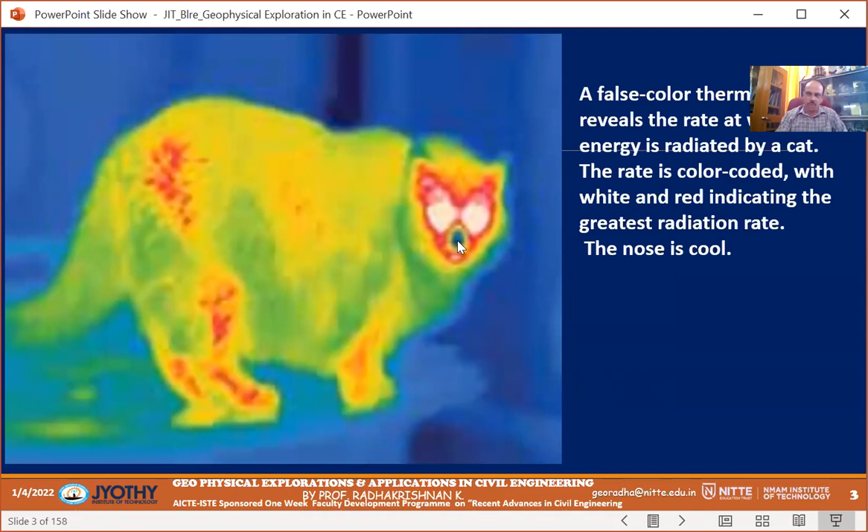I just want to impress upon you that there are so many physics principles, in the electromagnetic wave system, there are so many wave ranges which we have not used, or have not found specific sensors for utilizing. So we have a lot of physical abnormalities around us, with physics principles related to whether it's gravity, magnetic, electric, electromagnetic, or resonance. There are so many such factors.

So the question is whether these physics principles can be utilized for civil engineering problems. There is a lot of scope here. So far, what we have found out and utilized for civil engineering or geophysics is very, very less. So there is a lot of scope, that's what I just want to impress upon you. But we have not utilized it because many times we are not aware of these things.

So why geophysical diagnosis or geodiagnosis? Usually when we start with foundation problems, geotechnics is the main issue, because it's not a regional understanding—in geotechnics, it's a local understanding at the particular place. A sample will be collected, either an in-situ test will be conducted, or we'll take a sample and analyze it in the lab. But it only gives you that particular result, because each site is unique and varies from place to place.

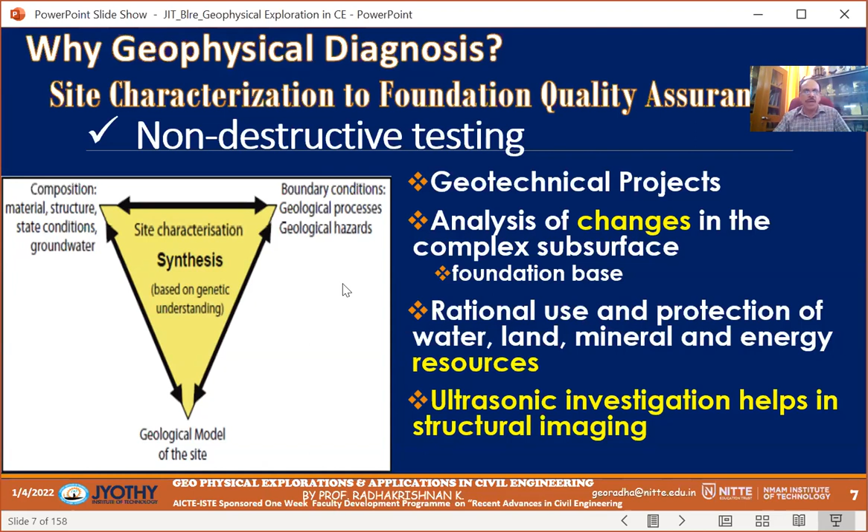These are the methods which we can adopt for investing money, because in most cases civil engineering projects will not have much money for this foundation work, and you have to drill here and there, and you will not get a better idea of it. So what is the need of the hour? A blend of the best.

So starting from the foundations to erecting the structures, as I told, it's applicable, whether it's concrete or foundations or anything. Virtually every structure is supported by soil or rock. Whether it's a tunnel, a dam or reservoir, a multi-story building, let it be anything, it's either resting on soil or on rock. So we should understand that.

And the current and future geocharacterization: seismic, ground penetrometer testing, seismograph, resistivity meter, dilatometer. There are so many such methods, and statistical analysis and numerical methods we are adopting with computerization.

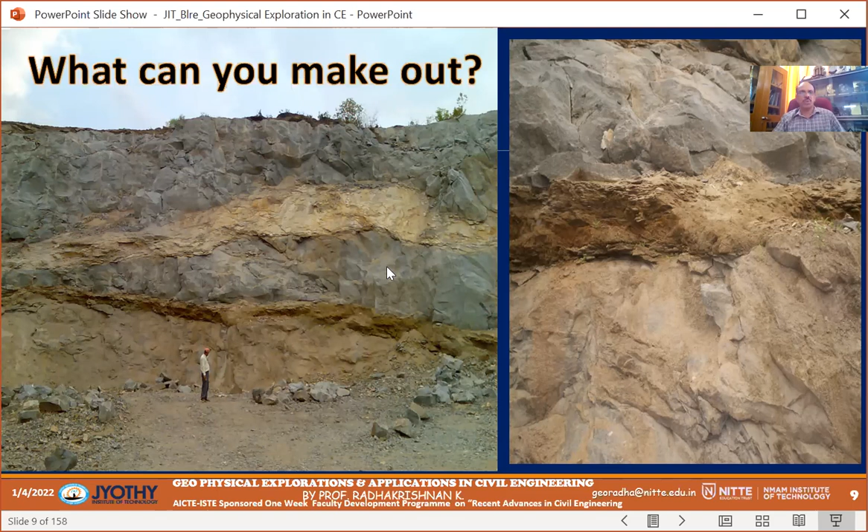So is the bedrock deep or shallow? Who will answer this? A geophysical method will tell you. Is the bedrock highly weathered or competent rock? Again, geophysical studies, a resistivity survey or ground penetrating radar studies, will tell you. Whether it is soft or dense, a magnetic survey may tell you that.

Where are the fine-grained and coarse-grained sediments for the coarse or fine aggregates you want to use? It can be told by geophysical surveys. Where are the best places to drill or excavate and sample the ground? Because again, that's a problem. In a wide area, how many sampling locations should there be? Where should you put the borehole so that you get the exact lithology which represents the entire area?

I'll show you one or two like this in my slides also. So cost-effective geophysical surveys are the best answer for all these questions which you are going to pose before starting any work. Typical parameters of interest to designers and engineers are usually the thickness and extent of layers. How much is the thickness of this particular layer? And the physical properties, the bearing properties, shear strength, all these things we test, bring it to the lab and test.

Okay, so recently we are getting some samples from Karwar offshore. They are going to have some constructions, and they brought the soil as well as the rock samples here for testing. So if you can conduct geophysical surveys and get an idea at what depth the foundation is, it will be highly helpful before doing all these things, because it will supplement them, because whatever is there below, it is only an interpretation, unless you directly see it and collect it. That's why there is no substitute for direct sampling of the ground.

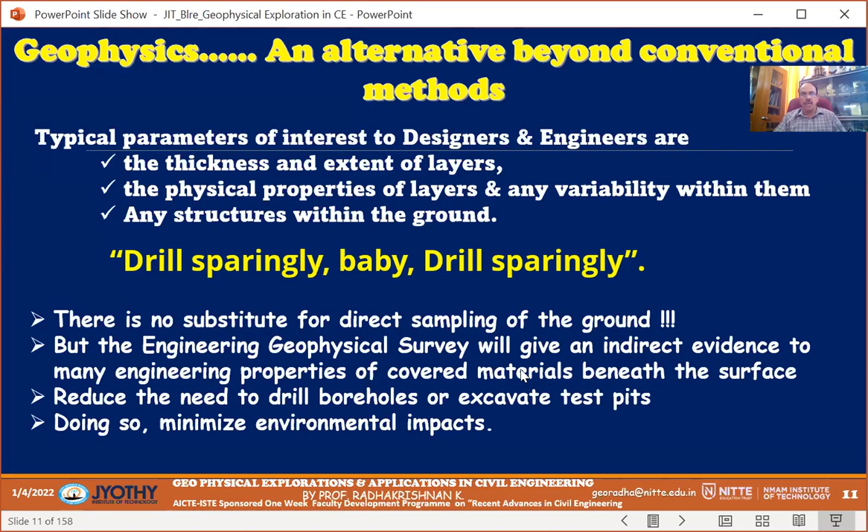All this is possible thanks to advanced geophysical studies, and you can even find out where there is groundwater, in which area it is. What will be the resistance of this area? Whether you can put an earthing for a thermal power plant, power stations, or railway lines, etc. We can think of where it can be a shallow area and put this.

So each site is unique, and site investigation and assessment is very important in the preliminary stage, as you know very well. Foundations, materials of construction, earth resistivity, groundwater, soil thickness, weak zones in tunneling, fault zones in reservoir sites, weakness in road laying, underground pipelines and cables. Often no record is preserved, so immediately after road construction they will cut, break and put a pipeline, and that will be damaged. So underground pipelines and cables, weakness and fissures in concrete roads, all these things can be identified.

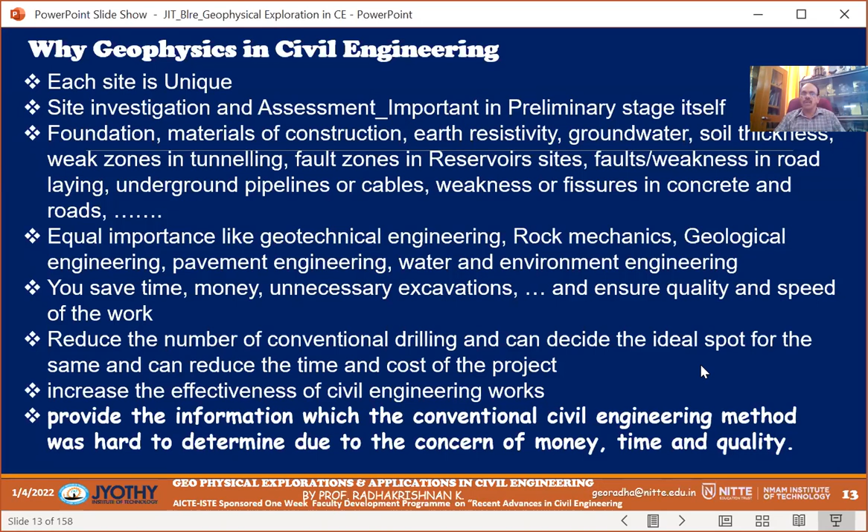Now, as I told you, I can list many things, starting from foundation designs, mapping overburden and soil thickness, volumetric calculation of fill or construction fill, how much has to be filled up, characterizing the geology beneath waterways so that we can optimize pipeline crossings, potentially hazardous abandoned mine workings, how much volume, in which direction the leachate will flow, surveys for construction aggregate mapping, seismic hazard evaluations, dam and levee assessment, permafrost mapping, and locating buried utilities. Many times these utilities are buried and there is no record available. With geophysical instruments, especially GPR, which is easy to use, just drag it along the ground and you get a 2D or 3D picture below, and you can understand what the buried utilities are.

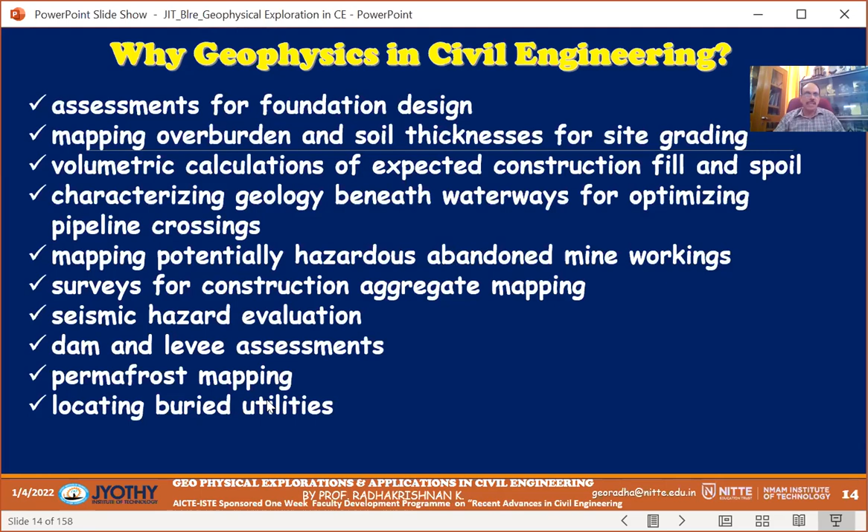So it is less expensive, less invasive, less time consuming, and provides large scale characterizations of the physical properties, that also in undisturbed conditions. You can see many of the times when we collect the samples in geotechnical applications, it is in disturbed conditions. The sample will be collected and it will be brought to the lab.

Locate and explore the characteristics such as depth, thickness, extension, resistivity of minerals, rocks, water, soil, subsurface layers, all these things. Then locating underground cavities, backfilled mine shafts and dissolution features. Then determine the stiffness properties of the ground, because sometimes the resistance will vary depending upon the stiffness of the materials.

Then an integrated approach with the conventional methods will enhance the project. So, as I told you, the potential of geophysics in engineering is yet to be realized, and the application of these techniques is still to be fully utilized. So now let us look at the different geophysical methods. This was a brief introduction about why geophysics and what it is, and what these geophysical methods are.

So we can broadly classify them into two categories: surface methods and subsurface methods. In surface methods, mainly whatever method we can conduct on the surface, not going down inside the earth or soil. So gravitational method: a sensitive gravimeter you can use, and Bouguer anomalies we can detect, because from place to place there is a variation in the gravitational pull depending upon the density of the material. When water is there, it is less dense material, or hollow things, less dense materials, can be identified easily for the foundation as well as groundwater exploration, etc.

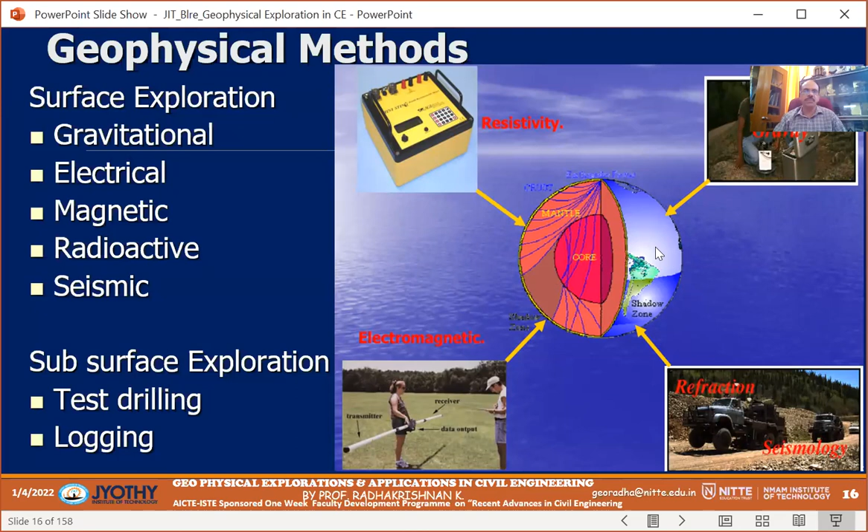So basically, physical properties such as density, magnetic susceptibility, elasticity, electrical conductivity, radioactivity, etc., are made use of in geophysical methods. So it is a wedlock between physics and geology for geological problems, using simple physics principles. One is, as I told you, gravity. It varies from place to place depending upon the density of the materials, and it can be utilized for porous materials or water, which have less density. So Bouguer anomalies are detected. Sensitive gravimeters are used for this.

Then another one is the magnetic method. As I told you, it's an indirect method. A dike or fracture zones can be identified because a dike will have a lot of magnetic particles, and there is a sudden variation in the value. There are two instruments: fluxgate magnetometer and proton precession magnetometer. I have used the proton precession magnetometer. It is a very simple, handheld, portable instrument. Then seismic methods, seismic reflection and seismic refraction, we'll discuss. And electrical methods, we'll discuss in detail.

SP methods: as you know, below the ground surface there is always a movement of ions, or movement of electrons happening because of the movement of the ions.

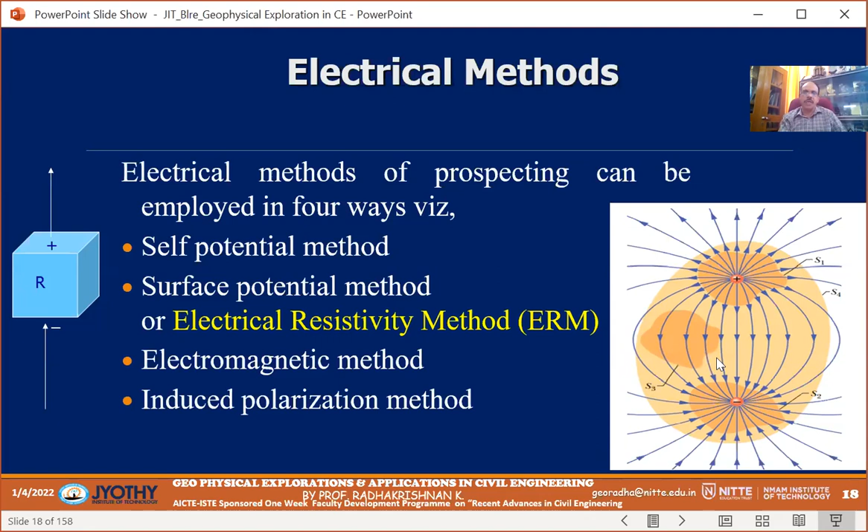So electrical resistivity method has so many applications. As I told you, we are not much utilizing it for road laying, for subways and the thickness, whether there is any fault; even GPR can be used for this. So these tomographic things we can produce, two-dimensional sections can be produced along the cross section wherever we want, so that it is better. So it is shown that the geophysical electrical resistivity method and the dynamic cone method show very negligible difference, almost similar values.

A similar calculation I have made for the SPT, standard penetration test, and the resistivity surveys. So these methods will give the thickness of the surface course, base course, sub-base course, and subgrade, etc. We can do a survey and find out how much they are, whether the concrete or the materials they used are in proper thickness. Because once it is covered, you will not understand, but we can do it. In most cases they put a hole and take the samples, but non-destructively we can do this test without disturbing it. That's what I do.

And this is used in many places. In Bokaro Steel Plant, they used it to delineate bedrock configurations, and in Andhra Pradesh, in the atomic power plant, they used it for the nature and position of the quartzite and to find out the thickness of the quartzite. And in some places, it almost matches the accuracy of borehole drilling tests. And I will tell you an example here; I'll show you later. ERM has been extensively used in a project in Madhya Pradesh to find out the thickness of overlying alluvial deposits. Then it has been used in hydro projects to detect faults, clay beds, caverns, limestone, etc.

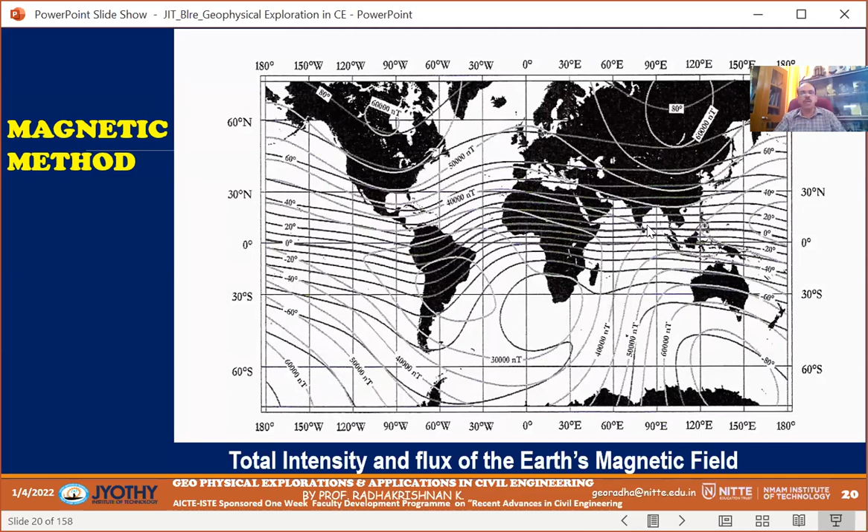This is a magnetometer, and there's a liquid in the coil, and it should be arranged in the north-south direction. There should not be any metallic parts over here. We have conducted it in our ground itself. This instrument will show you the different readings. So along these directions, suppose you want to take a profile. You are suspecting there is a dolerite dike.

In order to find a dolerite dike, we can see that there is a sudden change in the magnetic flux here, and it goes up, and again there is a sudden change where it ends, so we can mark it. If you make one or two stretches, even the direction of the alignment of the dolerite dike can be found, or an intrusive body or a boundary of a particular rock type. So this is the setup for that.

As I told you, there is a magnetic coil here and a liquid inside, and this is the instrument setup. You can interpret like this also: when you get a curve, you can plot it on a centimeter graph sheet, and you can see the depth also varies. See the widening of these bell-shaped curves; according to depth, it's also widening, right? Similarly, you can interpret a dipping dike, a shallow wide dike, and fault zones. Sudden abrupt terminations or changes in values can be noticed and interpreted. But it needs a little bit of technique.

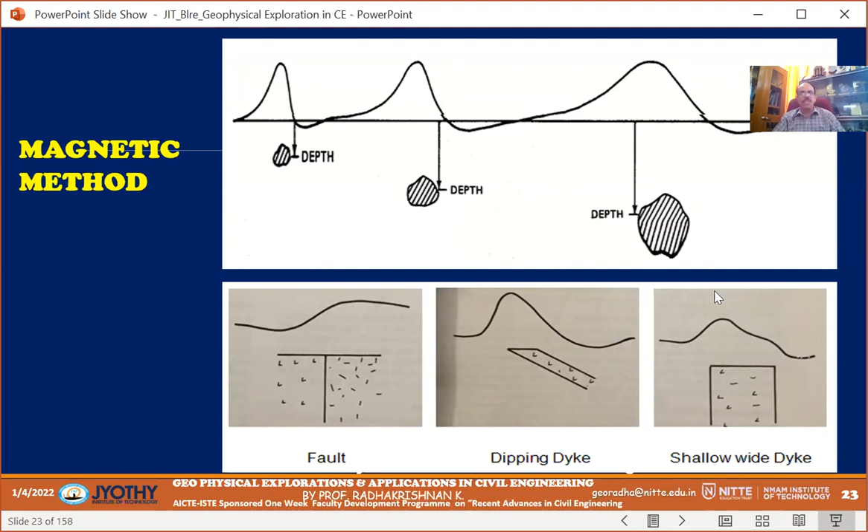This is one survey we conducted in Parapady, where we drilled a borehole and the yield was very high. In the initial survey, I rejected that site. It was one of my friends' sites, and I rejected it for further drilling. But later we conducted a survey and found that there is a fracture.

Two profiles were taken, and I could see here, as I told you, 41,000. Now here it is 35,000, so there's a drastic change in the value here. Whereas in this case, you can see that it is 41,000 to almost 40,200. There's not much variation, but here it is very significant. Then at this place we conducted the vertical electrical sounding survey.

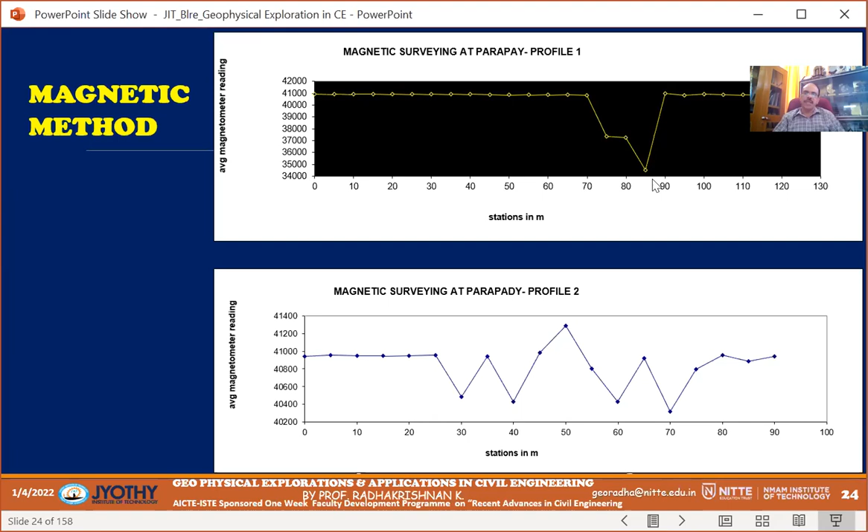Initially it was marked by lineaments from satellite imagery or Google Earth. We marked this, identified the area and conducted the survey here. I found that it is there, and we put a borehole after the vertical electrical sounding was conducted, and we could get the source.

Another one is the electromagnetic method, a sophisticated method where mainly electromagnetic waves are used. In geophysical hydrocarbon exploration, this method has been used widely. This is an airborne electromagnetic survey. The transmitter is located here, and you can see midway a magnetometer and a receiver.

It will be inducing a field, and if a conductor body is there, like water or an ore body, there will be another field, because the electrical and magnetic fields are perpendicular in direction. Automatically another induced field is created, a secondary field, which we can measure, and the variations can be understood.

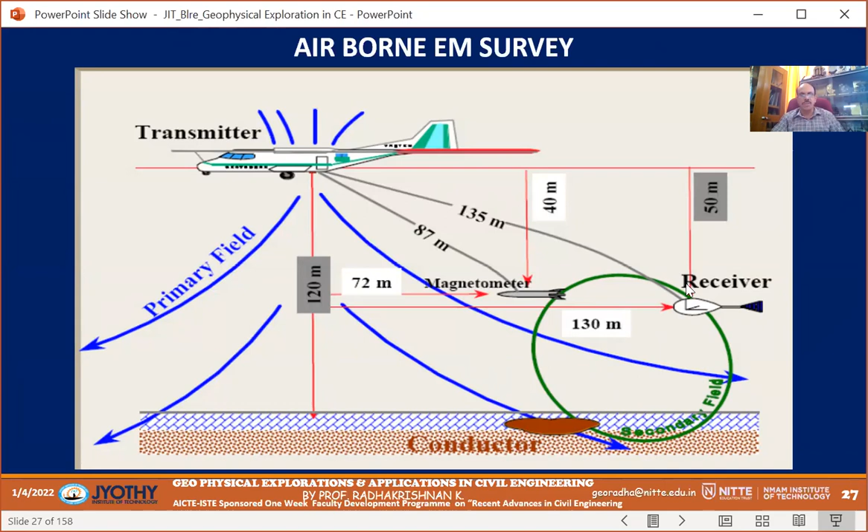These are recent methods which I have seen. Just before Corona started, I thought of training in that, and I went to CGWB in Bangalore. They had purchased one instrument and they were also in the preliminary stage of understanding it. But unluckily, due to Corona, I couldn't continue that.

So this magnetic resonance method they used is a direct method for detecting groundwater, and there's not much time involved in this.

What happens in this case is water will be in natural equilibrium, water molecules towards the magnetic north. When the current is sent, they will be polarized. So you transmit a specific frequency to excite the water.

They will be excited and will be shifting the polarization. For these polarizations to return back, it will take time. So when you send a current and stop it, depending upon the depth you want to penetrate, that much time, how many amperes, and how long a duration, you can decide, and based upon that it will turn back.

So the signal will automatically reverse back after some time. We have to take the time the water stands with the magnetic signal recorded on the surface, during its return to equilibrium. These properties can be utilized, and what is used here is a big rectangular or square loop created out of wires.

This loop is put on the ground, and you send the current, and it creates the resonance. As I told you, it will be charged - the protons in the water molecules will be charged.

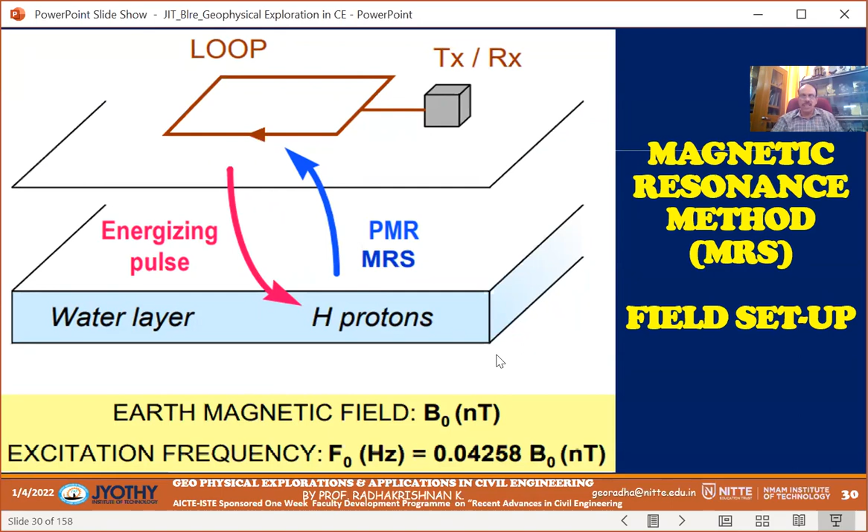Suppose this is the water layer - the energizing pulse goes out and the resonance comes back and is recorded by the instruments. It's quite interesting, and this time will decide the result.

Depending upon the depth of penetration, you can use something like 1 to 3 kilohertz, or 40 milliseconds time sending the current, and noise can be eliminated.

Now once you stop the current, there's a dead time of about 35 milliseconds, and it starts regaining the molecules back. So a relaxation signal will be coming, and based upon that we can interpret.

So look at this - the pulse moment and the curve we can understand. This shows a very shallow one as it is shown, whereas a deeper one, you can see the pulse moment is gradually taking place and increasing. And here there's a combination of shallow and deeper.

Similarly, there is a medium aquifer - look at the curve. Based upon the curve, the pulse moment and the signal plotted on the x and y axis, we can interpret the thickness of the aquifers.

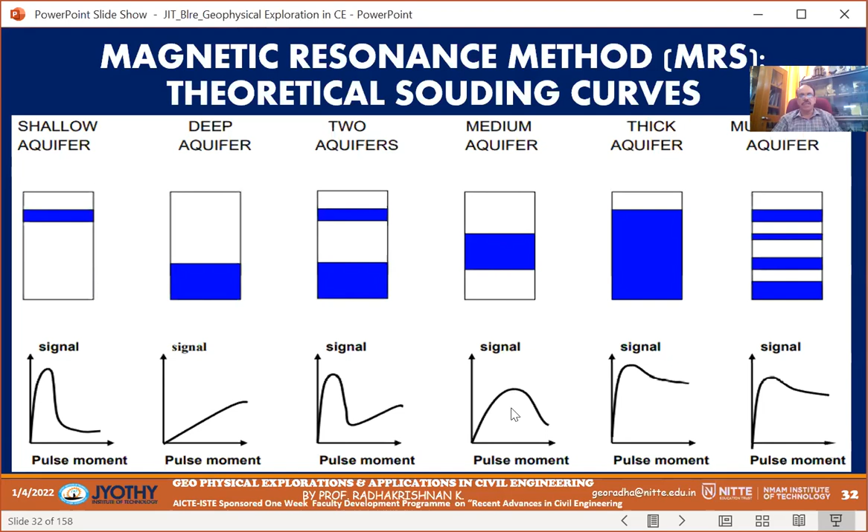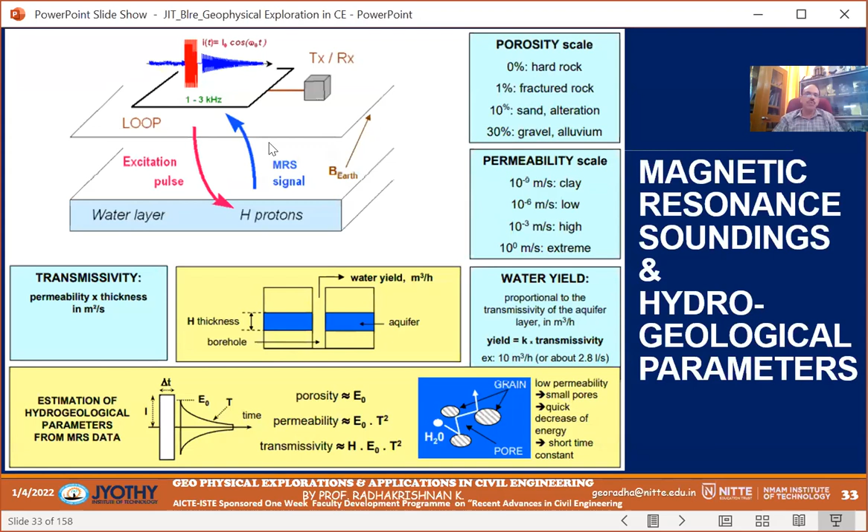So this is how the porosity, permeability, and thickness can be predicted based upon the values we get here. I'm not much familiar with this - I just know it and introduced the instruments, but couldn't do a field survey for that.

But I found this very interesting, and you can see the difference between resistivity and magnetic resonance signals. In magnetic resonance signal loop methods, even dry conditions can be easily found out using the curves - the pulse moment and the signal curve.

When you look at it, the signals will be very low here, whereas here you get very high signals. The pulse also, when the time increases for longer duration, is there, whereas it will be only for shorter durations and low.

But in the resistivity methods, what happens is we can't find out whether a sandstone is wet or dry - it won't make much difference here. But again, it depends upon the interpreter, who if experienced can do it.

So this can be used in another method - here you can see a dry area. In the dry area, the signals at depth - this is a depth factor here - you can see there's not much signal.

But in the wet area, the aquifer area, look at these pulses - they keep increasing. And second, you can see the water content is increasing like this, and permeability also is increasing down.

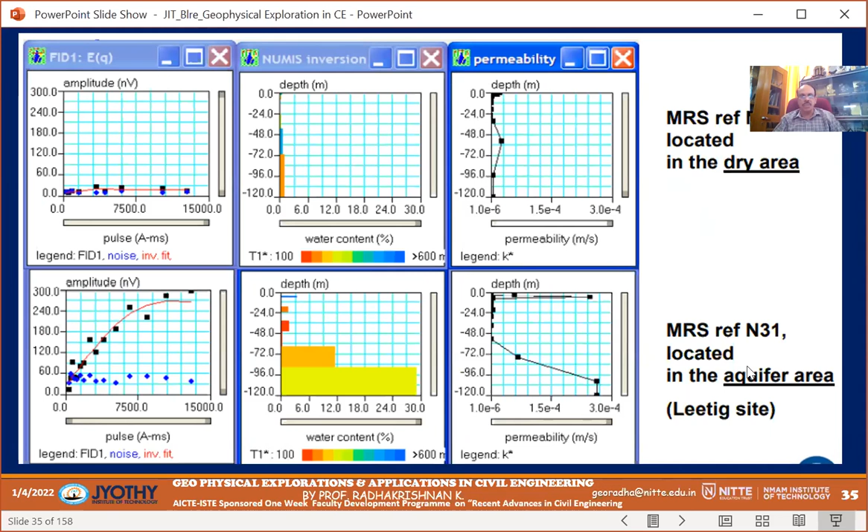So by that way, it can be decided what depth, because high permeability, high aquifer content, or the porosity is there, and transmissivity also, because that depends upon the thickness. So aquifer thickness, yield can be predicted easily from these methods.

Then another one is the ground penetrating radar, the GPR exploration technique that uses a simple instrument which you can drag along the ground, either a belt or a handle. A cable line or a fault or anything can be easily seen, just like a scanning image of what is down below. It's mainly used as an electromagnetic reflection technique, and the depth of penetration varies depending upon the antenna length, and the strength of the antenna.

I found that this can't be utilized for very deep things, but for a road study etc. it is very easy, I feel, because it's shallow depth. For some foundations etc., this is enough, more than enough. We can use it for archaeological studies, forensic science, pipelines or buried objects, geology and hydrology, engineering construction foundations, highway road surface analysis.

So the image is like this. You can see that very easily you can handle it. Only thing is some surface corrections you have to do. There are softwares available for that, so some undulations you have to flatten.

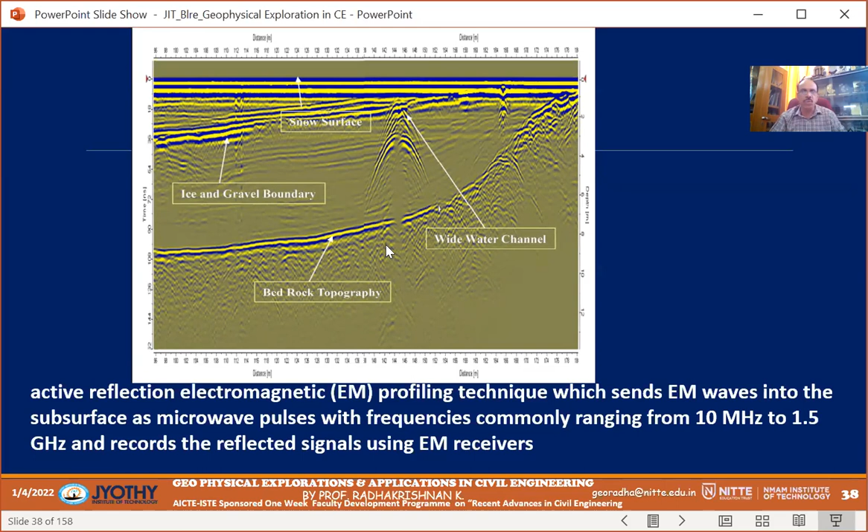But once you do that, you can see the bedrock topography, how a dumped material looks, and a water channel if it is there. All these things, or a buried material, you can identify using this reflection electromagnetic profiling technique. It uses 10 megahertz to 1.5 gigahertz frequencies mainly, and it varies, as I told you, with the antenna.

So quality assurance in foundation engineering can be given by this method, checking foundation elements, because it's not accessible for visual inspection, but this it can be done. There are small changes in construction material, concrete mixture, whether it's proper, you can understand.

Passive seismic interferometric techniques are used for ultrasonic transmissions and tomographic studies. We can do it and understand whether the masonry constructions or the concrete constructions are proper, or any mistake is there. Then moisture and corrosion detection is also possible using these techniques.

Structural investigations allow the detection of rebar and other elements at depths greater than those accessible by conventional eddy current methods. So instead of eddy current instruments, you can carry this. It checks foundation elements, geometry, integrity, and durability, and gives a better detection rate for metallic objects than ultrasonic methods, because this will not have any problem with metallic objects.

Then spectral analysis surface waves, and multi-station analysis of surface waves can be utilized. This allows effective pseudo 2D imaging of the shear wave velocity. Then quality assurance in foundation engineering, and passive seismic interferometric techniques for tomography, etc.

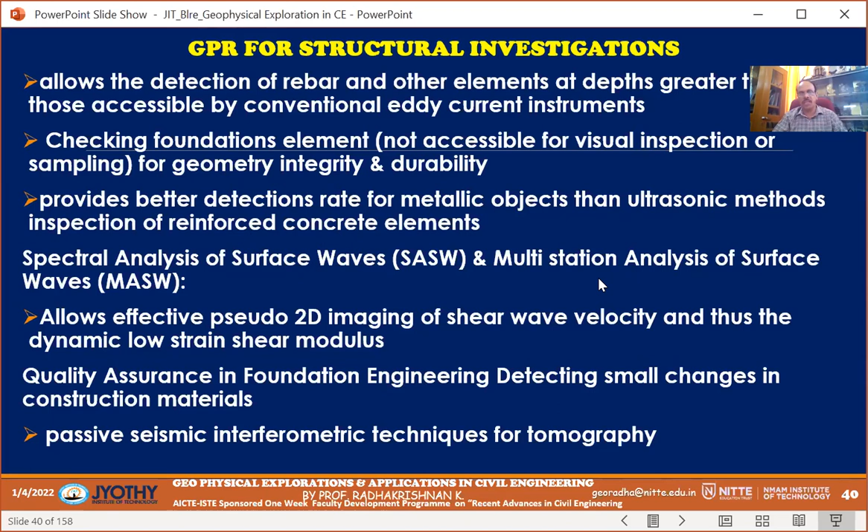Now another one is seismic methods, widely used for oil exploration etc. I'll just run through it because the main topic is still remaining. So seismic reflection method and seismic groundwater exploration, mainly seismic refraction method is utilized, and whenever the wavefront hits a water body or a boundary, it will be reflected as well as refracted depending upon the elastic medium. So that can be utilized for this. There are so many advantages for groundwater table, weakness zones, etc. I'm not going into much detail there.

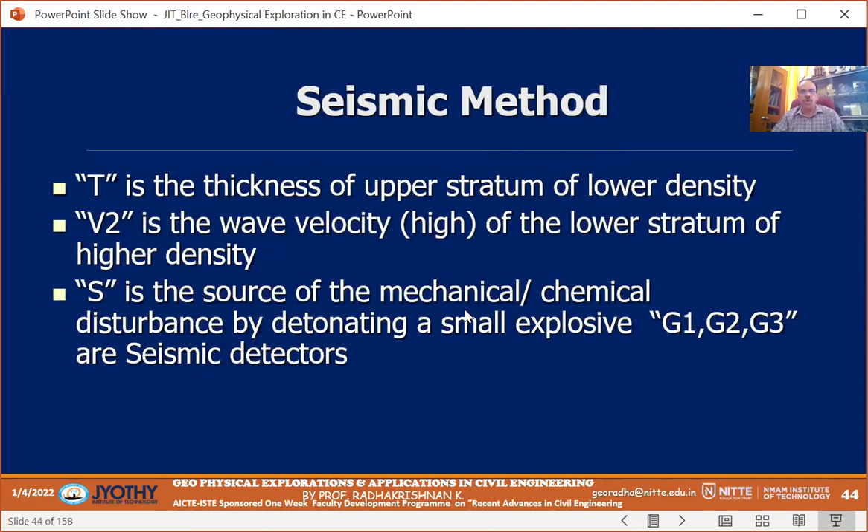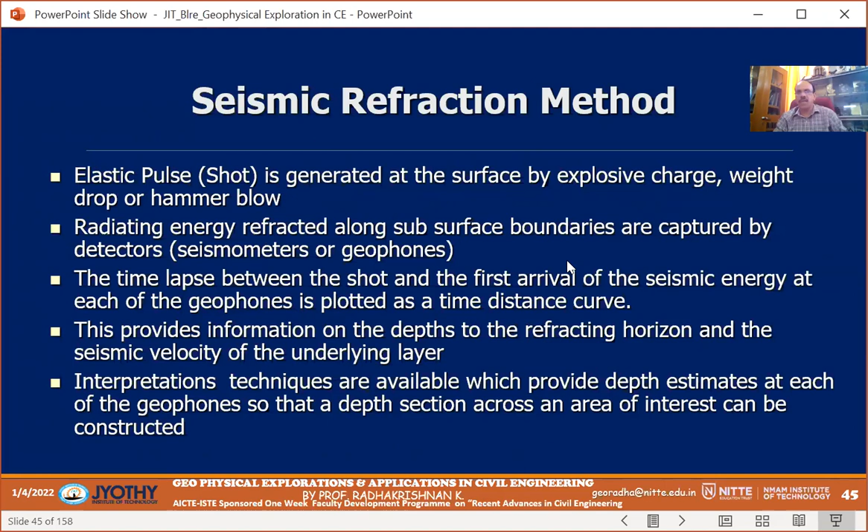So seismic propagation, the types of artificially generated waves in the ground. Then in refraction methods, a charge or a weight or a drop hammer is used, and geophones will be connected at different distances, and the time to reach there is taken into consideration, and we can calculate the depth of the body which is there. So this is the method.

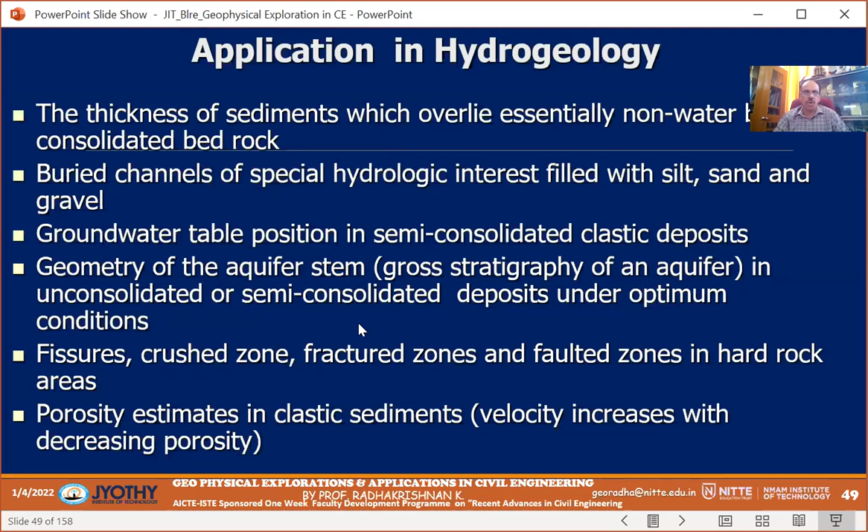So each of these velocity time lags, reaching from primary to secondary waves, that time lag we can plot out, and we can find out the depth of each wave type. Then refraction methods are mainly used in buried channels, groundwater table positions, fissures, crushed zones, porosity estimation, etc. Then we'll come to the main thing, which is the electrical methods.

Usually in electrical methods, one problem is that we need a straight line for laying the wires, because the potential electrodes and current electrode should be laid in a single line. In some places like cities, this will not be possible. So we can put one current electrode at infinity, or use dipole methods or something like that.

There are different configurations, but I will mainly discuss the commonly used configuration here.

So that's the situation regarding electrical methods and resistivity, which is an inherent physical property of substances. Resistance offered and resistivity are different. The resistance offered to the flow of electric current by a unit cube of a substance is called resistivity. There are good conductors like pyrite, chalcopyrite, etc. Many sulfide minerals are good conductors, but the majority of ore minerals are poor conductors.

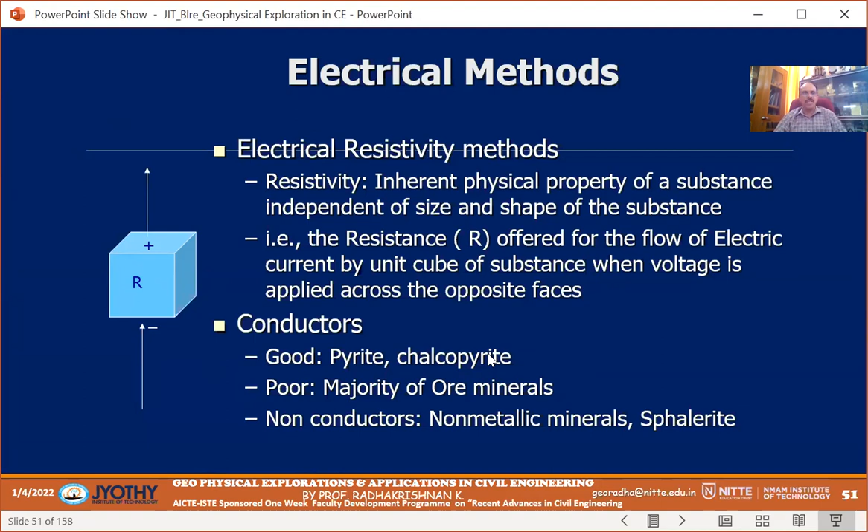Water is a good conductor, so that is one advantage. It all depends upon the mineralogy, porosity, saturation, and quality of the saturating fluid. If it is highly saturated, there is high conductivity, and if it is highly saturated with salt water, conductivity is still higher. I have an experience from a survey conducted at NITK beach.

All 5 instruments we tested failed there because no reading was shown. I thought the instruments had failed, but when I went back to the lab and checked, they were working. The issue was that it couldn't even read the reading, because of the high conductivity there was no resistivity being offered.

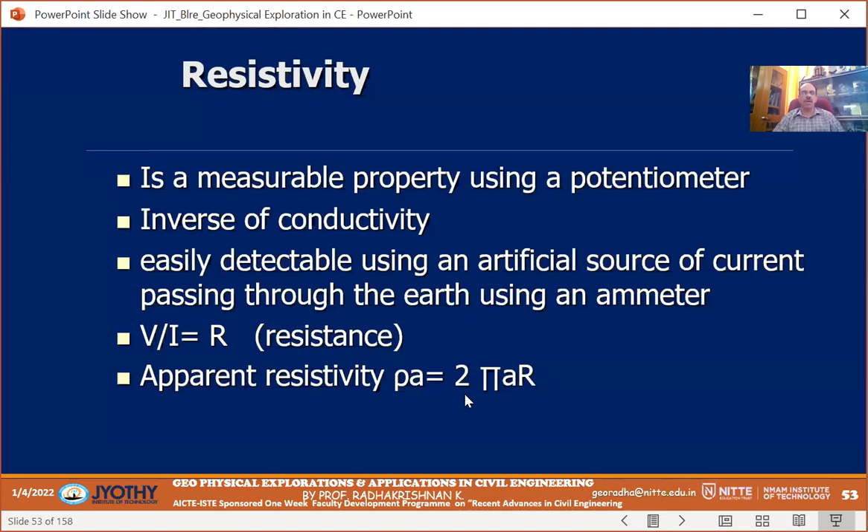So we can find this out using these equations, because there is a difference between resistivity and apparent resistivity. Resistance is what we get directly with the instruments when recording in the field. But apparent resistivity depends upon the material or the geometry of the setup used, so a factor has to be introduced. 2 pi a is the factor introduced, multiplied with the resistance we measured, and this depends upon the geometry of the materials. This is how it is derived.

If you take a wire of a certain length, resistance is directly proportional to length and inversely proportional to the area of cross section. That is why in transmission wires they use twisted wires, because transmission loss can be reduced when the area of cross section is more. It also depends upon the material; the resistance offered by a copper wire and an aluminum wire is different, so resistance offered by different materials varies.

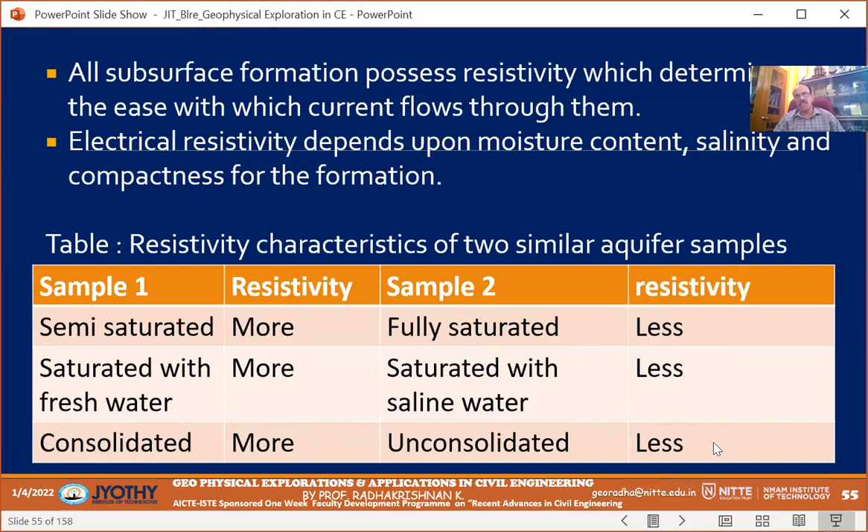This can be calculated and found out using certain methods that we are going to discuss. You can see how it varies: semi-saturated material will have more resistivity, but fully saturated will have less. So saturation is one factor. Saturated with fresh water gives more resistivity, but saline water gives less. If it is consolidated, resistivity is more than if unconsolidated, which gives less resistivity. This gives a clue about what type of material lies below, based on these properties.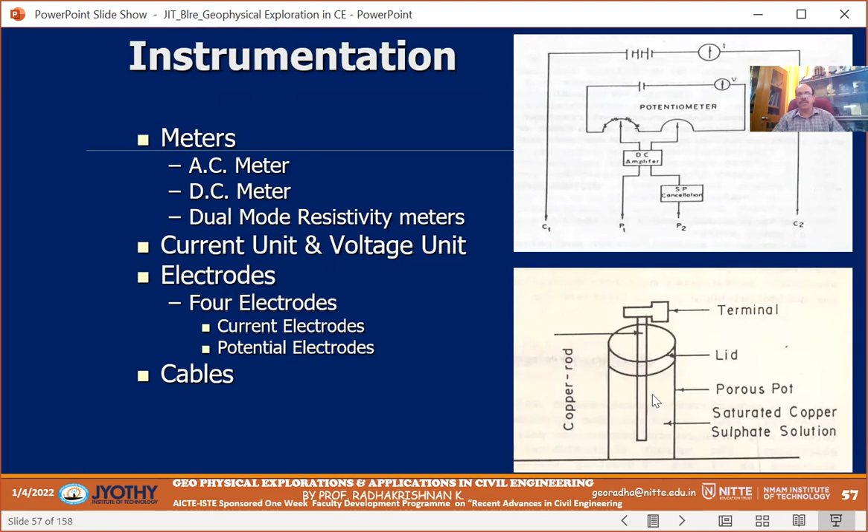There are two types of methods: one is vertical electrical sounding, which we call VES, and the other is profiling or traversing, scanning at a stretch in different places along the line, called profiling or traversing. It goes up to 50-60 meters depth, depending on how far we are placing the current cables. This is the vertical electrical sounding, using the Schlumberger arrangement configuration.

So the potential electrodes will be very close to this instrument, 0.5 meter or 1 meter. That will be varying after some time. But we can say very close, connected to this point where I am surveying, and the current electrodes will be put far away. And gradually the distance of the current electrodes will be increased, while the potential electrodes will be kept constant.

This is one method. And the other one is the Wenner electrical sounding. This is the Schlumberger configuration. In the Wenner configuration, all these distances will be equal. That means the distance between the two potential electrodes will be equal to this distance and this distance. All electrodes, that is a Wenner configuration.

But most of the time we use this method in these areas because it saves time, because all the 4 electrodes have to be changed otherwise in Wenner, whereas here only 2 electrodes have to be changed. So it should be arranged in a straight line. So it will give the promising potential aquifers and saturated zone, and the quality of the water also.

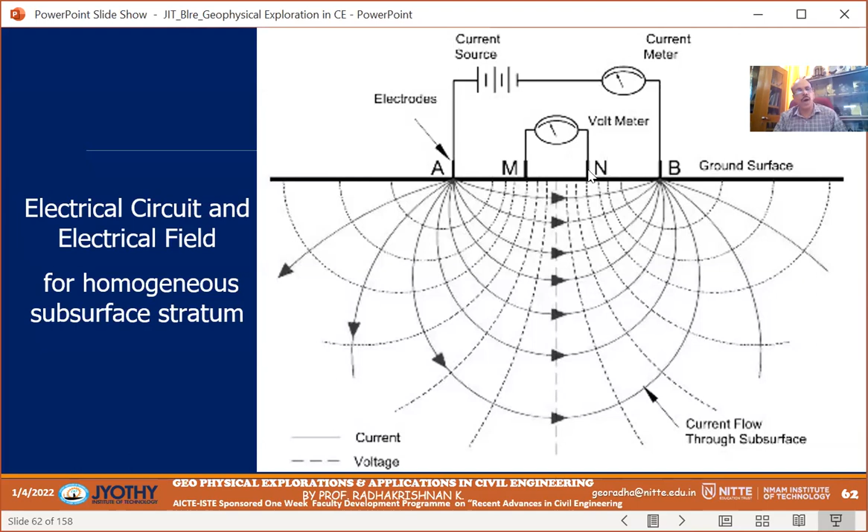So V by I is equal to R, that's Ohm's law. As a result of the current, a potential will be developed in between. So we use a sensitive voltmeter and measure it. I we know and V we know, so we can find V by I equals R multiplied by this factor K, and K is found from 1/AM minus 1/BM minus 1/AN plus 1/BN. That is simple, as you can see here. Yeah.

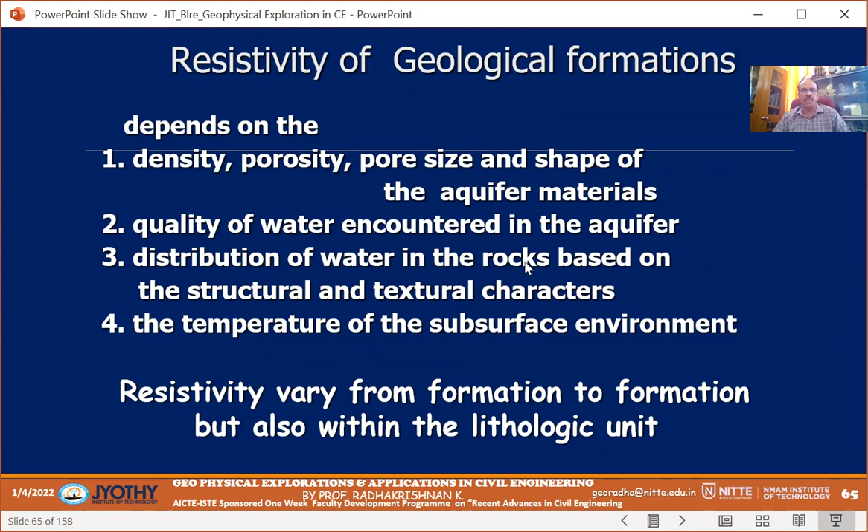We'll come to that. So in water bearing formations, the contrast can be fresh water and so on, weathered, hard rock, etc. And it depends upon the density, porosity, pore size. So by looking at the value and the curve, we can interpret the bottom as well as the formation type. And it varies with the temperature also. Igneous and metamorphic rocks are very high, 10 raised to 2 to 10 raised to 8 ohm meter. I will show you some examples.

Sedimentary and unconsolidated, look at that, the values are very less, because it's a porous environment. So porosity has an impact, and hardness gives high values. Sometimes in laterite terrain, the current will not go at all. So we have to pour some salt water at the current electrodes so that the current will be good. Otherwise, it will not transmit. So such problems also will be there.

So this is the analytical derivation which I was talking about. When a current is sent here, spherical equipotential lines will be created around it like this. It's just like a spherical flow pattern. And this radius has an influence.

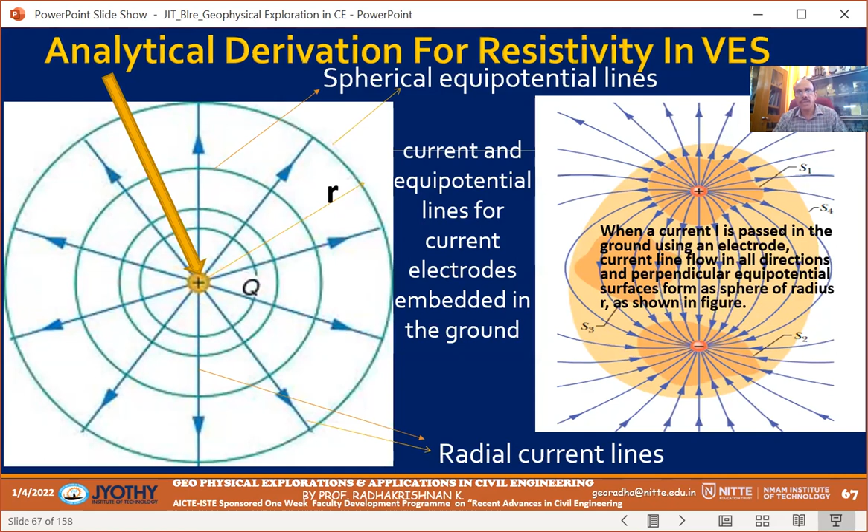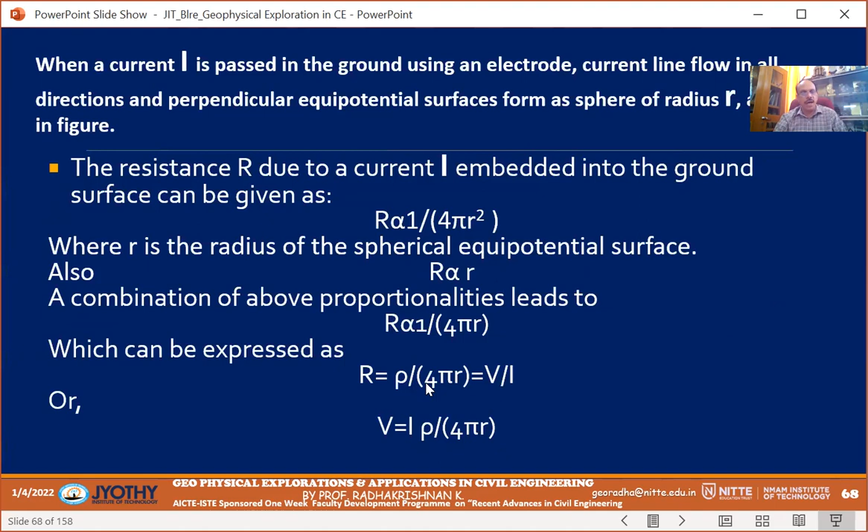And again, I am not going into much of this, but we can understand that V by I is equal to R, and R is nothing but rho by 4 pi R. Since it is a half, because it is not a complete globe, it is going only hemispherical, so we are taking it as 2 pi R. So this is how it is derived, and this is the Schlumberger configuration when you take this R1 and R2. This is what we have done, right?

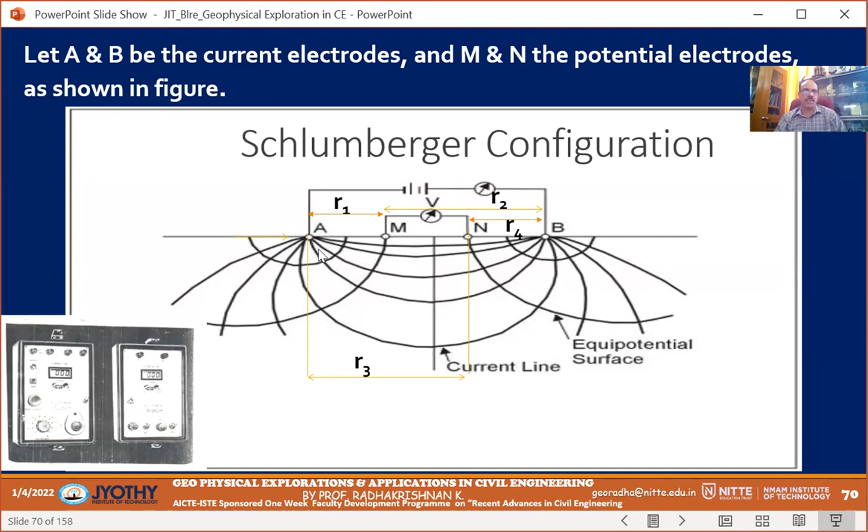Potential due to A, this current, at M, at the point here. What will be the potential created by A at M? What will be the potential created by B at M? And what will be the potential created at N due to A and at N due to B? And this is derived here. Due to A at M, it is I rho divided by 2 pi R1. And in a similar way, due to B at M, it is minus I rho divided by 2 pi R2.

So the net potential is calculated here, right? This minus this. So finally, you will get an equation: Delta V is equal to Vm minus Vn. That is voltage at M minus voltage at N, the potential difference between these potential electrodes, and that is I into rho by 2 pi, into 1 by R1 minus 1 by R2 minus 1 by R3 plus, because minus into minus is plus, 1 by R4. So this is what we have derived from these things.

So finally, rho A is equal to K into delta V by I. This is a constant factor which we derived right now. It depends upon the configuration; this value will be varying. AB by 2 minus MN by 2 the whole square divided by MN for the Schlumberger configuration. It varies for the other one, the Wenner arrangement. So finally we got rho A equal to 2 pi A into V by I, which is R; we derived 2 pi A from that.

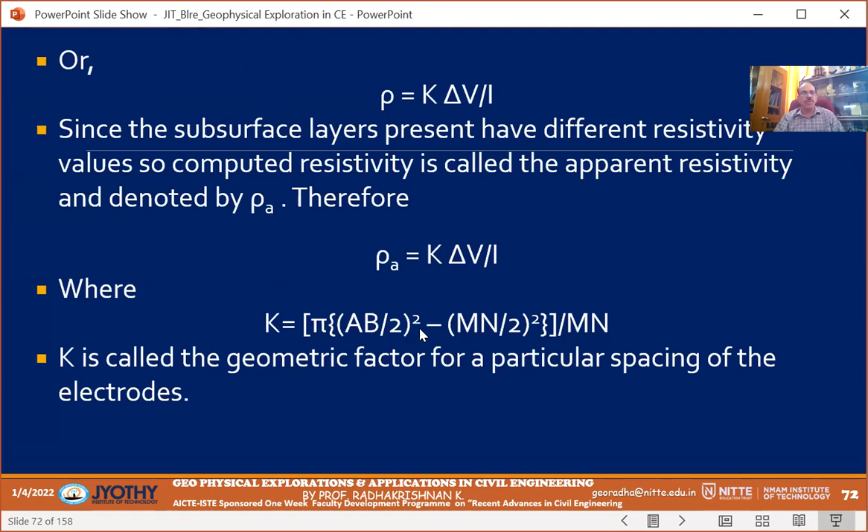Similarly, for the Schlumberger configuration, it is pi into L by 2 the whole square, which we derived right now here. L by 2 the whole square divided by MN, into V by I. This is R. So this reading we are getting in the field, and we have to multiply it by this constant factor. We get the apparent resistivity instead of the true resistivity.

So this will be plotted in different ways. You can use the master curves; Orellana and Mooney is the Bible for that. There are different master curves we have to match. It's a tedious process. Computer modeling is what we use nowadays. Initially we used all these things, but with interactive computer modeling or inversion methods, we can feed the data. A synthetic curve will be produced with the original plotted curve, and you have to match it; the one coming very close will be taken. Then the inverse slope method: this method is very easy, and software is available.

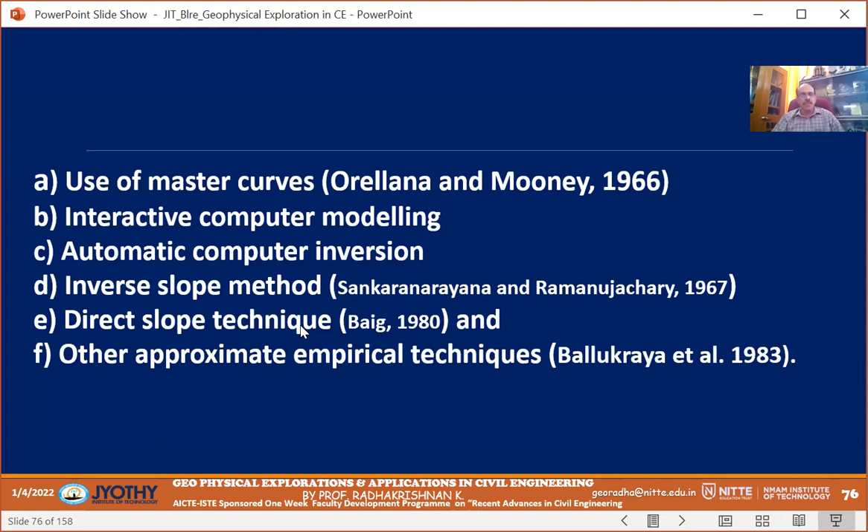It is from Ramanujachary's PhD thesis; he was working earlier as a scientist in the National Geophysical Research Institute in Hyderabad. He trained me very long back, in 1990. So I use this inverse slope method because it is easy. We also use the other methods because software is costly. Direct slope methods and other approximate things can be used. So look, this is the curve we finally get. We are plotting the AB by 2, from the central point to the current electrodes, which is called AB by 2.

And here is the resistivity which you are getting. So say for 10 meter, 1 meter, I am taking 10 meter. I am interested only in an open well, so I will take only up to 20 meter. So this will be plotted in double log sheets. So when I plot this, you can see one curve I plot. The values going on, it's a homogeneous curve here. Values going on decreasing here, and it's increasing.

So if it comes to 45 or more, it shows hard rock. So if you are looking for a foundation, when you conduct a survey, if you are interested in foundations, where the hard rock starts, where I have to put the pile or the foundation, up to this will help you, because where it starts, that will be the point where the hard rock starts. So 45-degree inclinations. So this shows that rho 2, that is the second layer resistivity, is less.

And this one can be for an open well also, because here the values are pulled down. Whereas in this case, it's an A type of curve, very hard rock, going on increasing, no water in this. Whereas here in this case, the Q type of curve, the rho values, apparent resistivity values, going on down, pulling down. That means it will be saline water if it's deeply pulled down. It will be shallow if it is very close, and it depends.

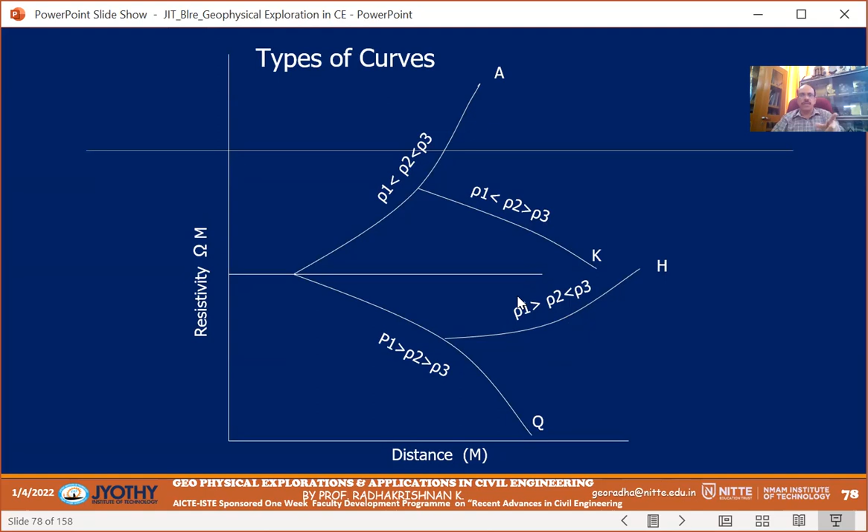Water is dripping, you can find here as it is. Right here also water is dripping. So here it is an open well, an aquifer is there and it's going on. Now if it's more than 45, you'll get foundation rocks. So this way we can interpret. It's 3-layer curves, rho 1, rho 2, rho 3 curves.

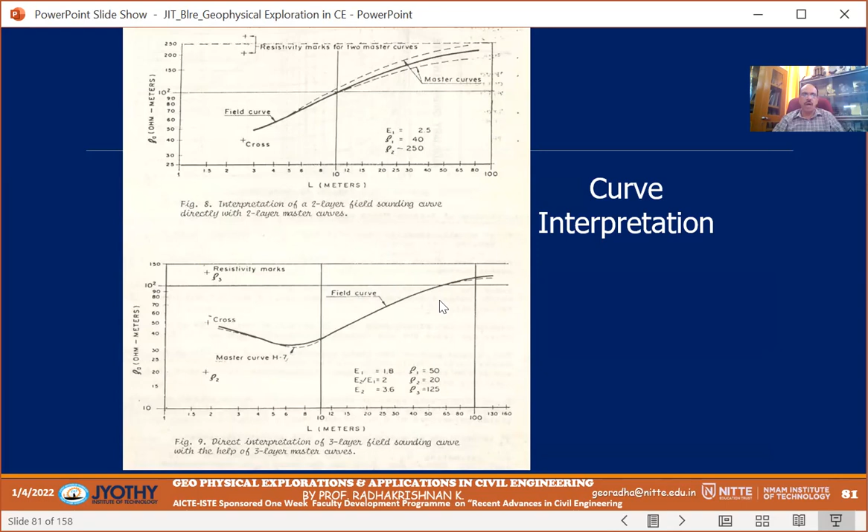So now some typical curves as I described: A type of curve, H type of curve, K, Q type of curve, etc. Now let's look at these typical resistivity curves and how curve matching techniques are used in interpretation. I'm not going much into this. This also I'll skip. So as I told you, 45-degree if the curve comes, though this is not a hard rock. If it's a bedrock non-fractured, or a fractured bedrock, even the shifting in the values can be seen and interpreted.

So with a little bit of expertise, just by plotting the curve you can say where the water is available and what the thickness is, etc. There's no need of interpretation also, but interpretation will give you a much better analysis. So these are the geophysical target zones, fracture zones. Okay, so you can see how the same curve is matched and interpreted.

And as I told you, how will you understand a dike? You can see that there is a sudden increase in the resistivity value, whereas in the fracture zone the value is going on decreasing. So if I am going for groundwater, I will look for this type of curve. Okay, and it is plotted in centimeters. And when it's a dike, on this upstream side of the dike, I will prefer a good borewell here. But here there will be no water.

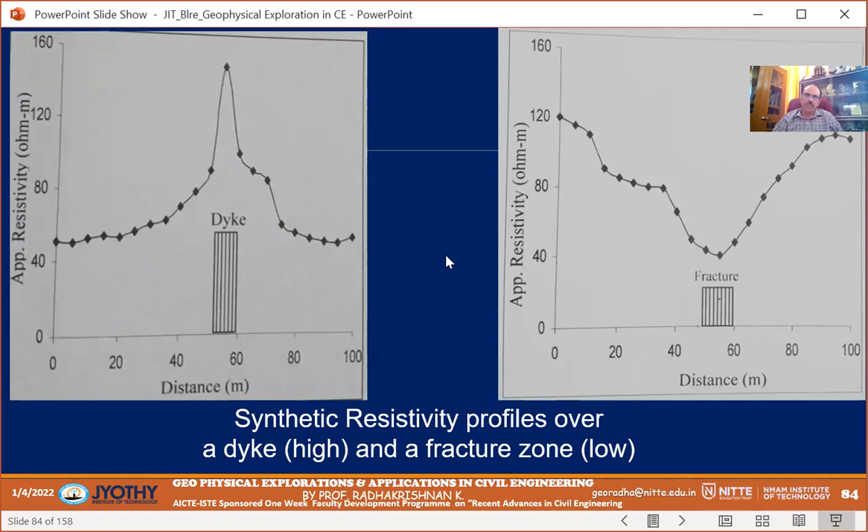So these are the things which you have to interpret based upon the geology of the area also. So this is the profile of a dike, etc. I'm just skipping it. So, strip resistivity curve.

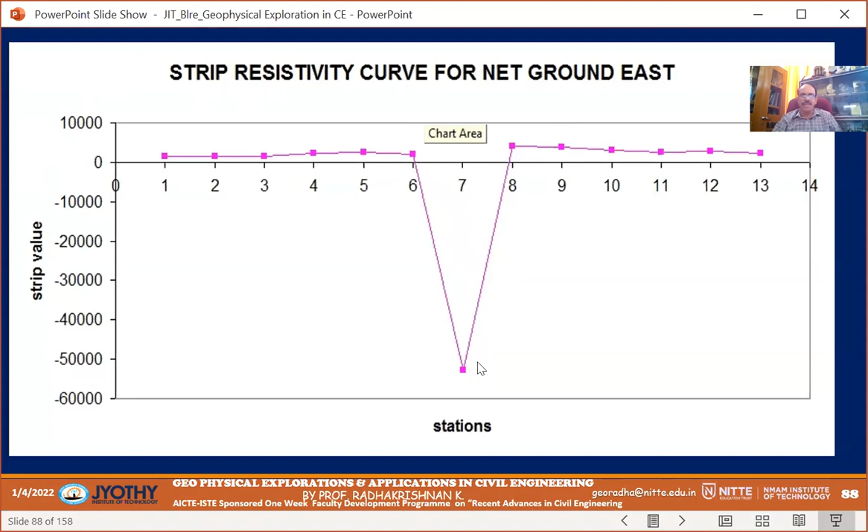Sometimes in an ordinary survey, we will not find a fracture zone, a potential zone, which is very small in thickness, but using the strip resistivity methods, conducting 2-3 layers and subtracting that, we can find out the real lineament or fracture zone, and it will yield you good water. So this is one we have conducted on the ground here and drilled. Here you can see a sudden variation in the value which happens here.

So why geophysical explorations? I told there are so many purposes: earthing surveys, foundation, detecting lateral changes, detecting faults, detecting groundwater table, groundwater pollution, underground seepages, sewer leakages, subsurface archaeological remains, environmental applications, exploring subsurface sources of mineral ores. All these things are possible here. I'm not going much into detail because of the time shortage.

Sir, when should I stop so that I can arrange my slides? Hello? Sir, am I audible? Yes, sir. How long can I take? Sir, you can take another 15 minutes. Okay, now I'll arrange like this.

Okay, thank you. So earthing surveys detect depth, thickness, and conductivity. Nowadays when we put the earthing, we dig a pit and put all the carbon materials, etc. But in power stations and many places, we did the survey for that area, because we have to conduct a grid survey and understand which is the place where, if any problem happens, the fault current should go there and be immediately absorbed. So we have to find that out. For that purpose, we can use this.

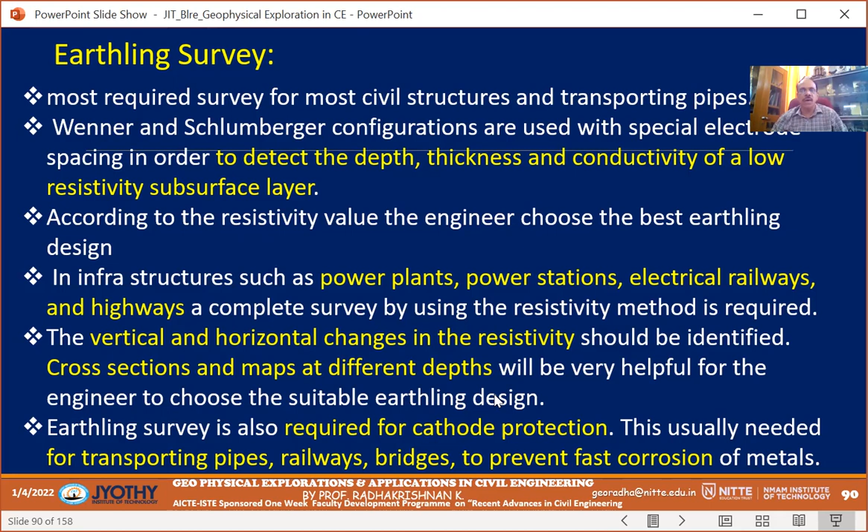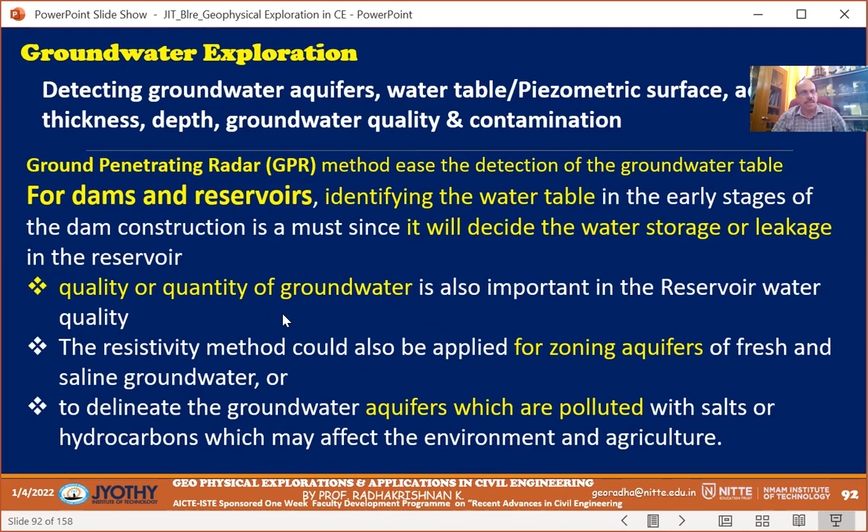So power plants, power stations, electrical railways; vertical and horizontal changes in the resistivity have to be mapped. We can prepare these things. Then lateral changes in soil properties, profiling techniques, geoelectric sections and contour maps, detecting faults and weaknesses. Groundwater exploration, I already explained. GPRs can be used in shallow depths, then polluted and seepage water can be found. Underground pollution can be understood. Archaeological remains, buried remains and features can be studied by this.

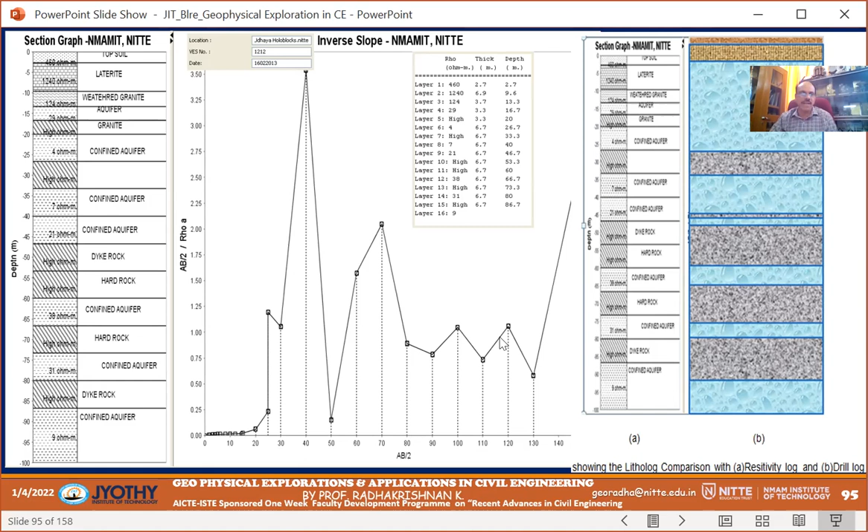We compared the resistivity log and lithologies here, and found that it's almost matching. These are two examples I have taken from NITTE only. This is one, as I told you, Parapadi, where the magnetic profile shows the variations. There we conducted a survey and drilling, and found that the aquifer was almost where I predicted. It's still yielding with the same high yield even after a few years. So I could find a major fracture zone there. These are all aquifer zones I marked. A multi-fracture, all confined aquifers, still yielding well.

And this is again our psychiatric hospital here, where we conducted a survey. It was almost all dry, but we found a confined aquifer at this depth, and the drilling also proved the same depth. So it is exactly matching. That's how vertical resistivity can replace your drilling and you can save a lot of cost. Interpretation should be proper. That is important.

So you can put this in a GIS or in a three-dimensional way. You can see the entire Mulki River Basin, my research area; I plotted the variation in depth to bedrock from the surface from the data. You can see where the resistivity is low, the bedrock is very deep here, and here the bedrock is very shallow. So for foundations, or where you want to put borewells or open wells, you can use this.

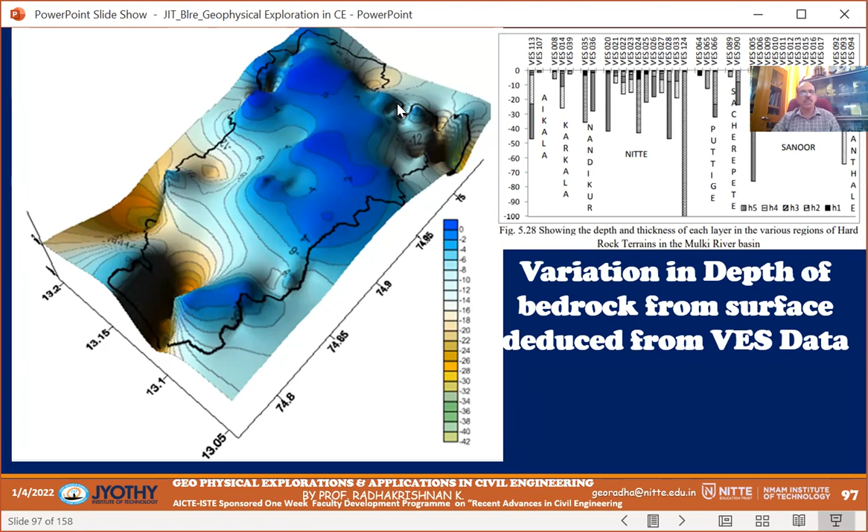So these are the curves from the Mulki River Basin itself. Look at the different types of curves. Here I used IPI2 methods. It's a simple method, not inverse logs. But here you can see each layer; this is a layer at almost 45 degrees, right? So each layer can be interpreted.

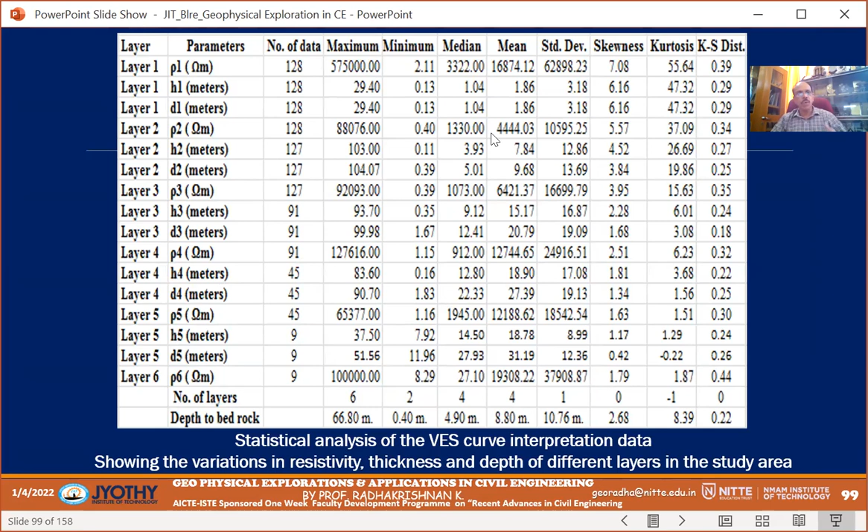There are different types of layers, which I found from the VES curve types. Six types of layers, six layers maximum I find in this area, and a statistical analysis can be done, and you can plot it and say what the maximum and minimum variations in the resistivity as well as thickness are.

So layer by layer: are you interested in the top layer only? Okay, look at that. You can plot it. And what is the resistivity? As I told you, earthing and other processes require it, and for building also. So what is the thickness of it? You can map it and give it as a 3-dimensional map.

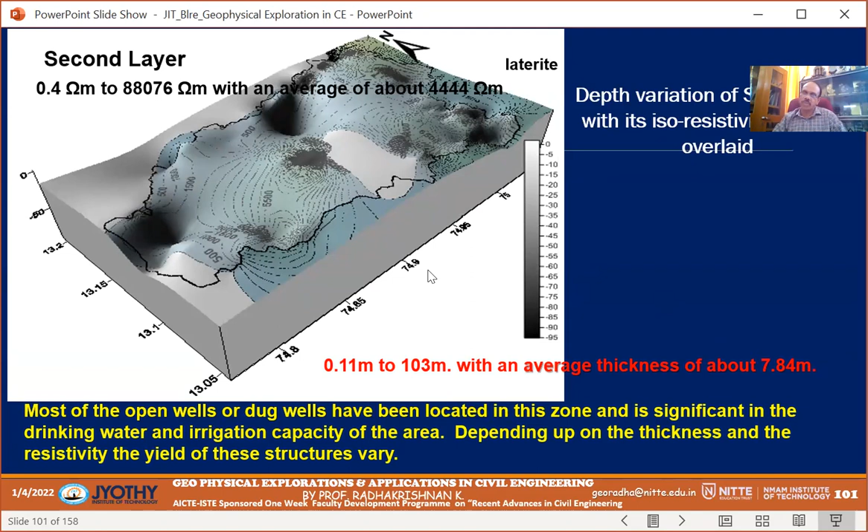Second layer: what is the thickness, from where does it start, and how does the thickness of the second layer vary from place to place? So the 2 parameters I have made into a 3-dimensional figure. I can give it here because isoresistivity contours are overlaid. Third layer, like this layer-wise I can prepare, and predominantly in the third layer I found H type of curve, right? And secondly, K type of curves.

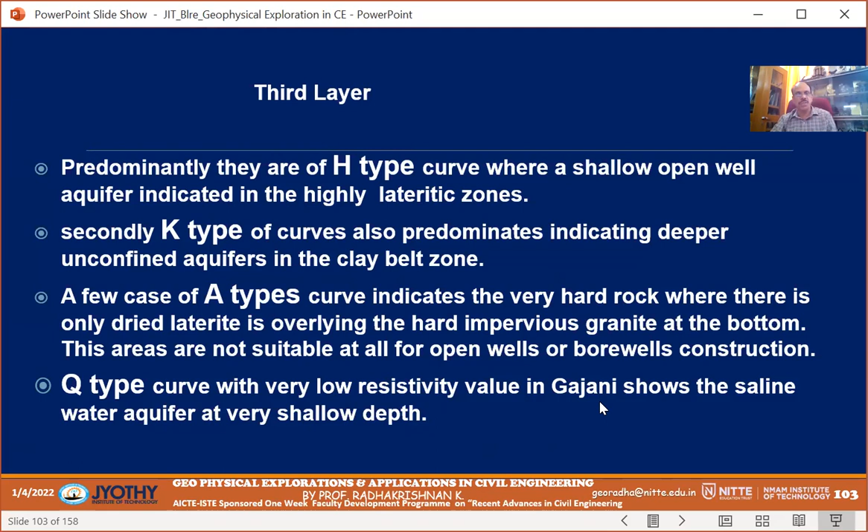K type of curve means top layer; this is the common thing. And finally, I came to a conclusion on what the lithology of this area will be. In a few cases, A type, there is no water indication, very hard rock. At the very beginning itself, it starts. Then Q type of curve, saltwater intrusions, some area in Mulki, near Gajani, etc. We saw that. Okay, so this is the fourth layer variation in isoresistivity.

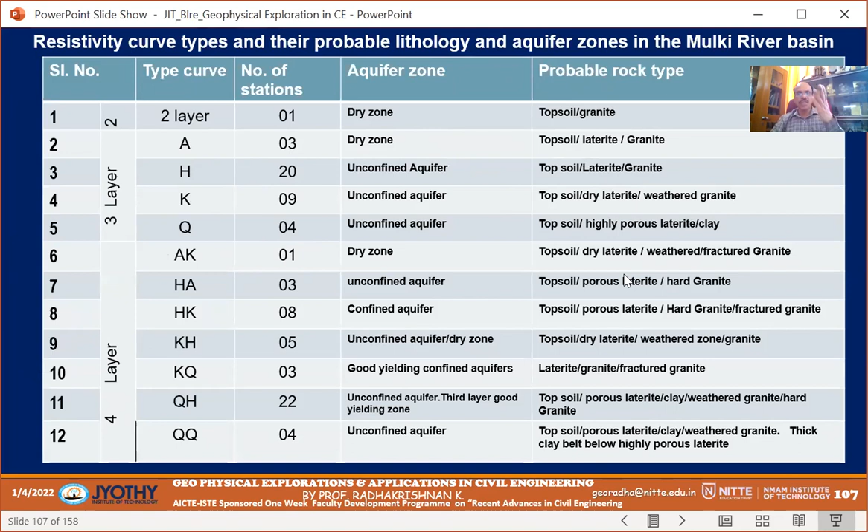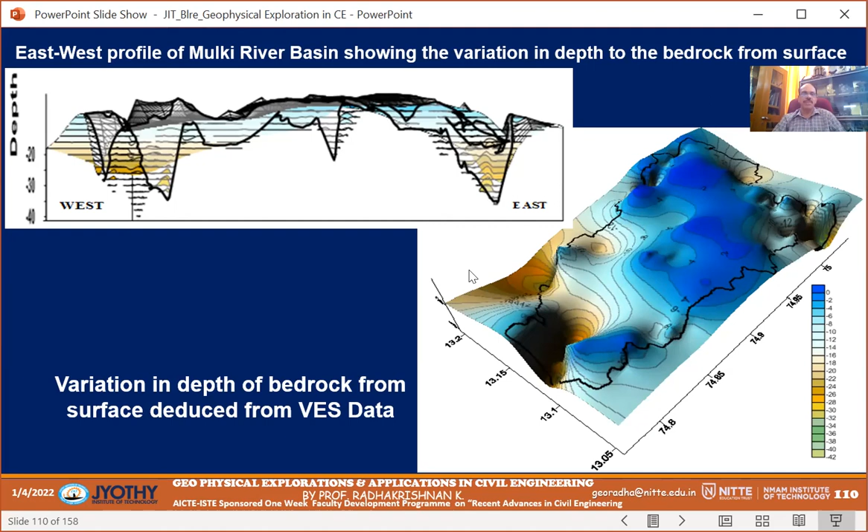Then below that, the fractured granitic gneiss, the basement rocks, and the hard granitic gneiss. This we can prepare in any area where you want to have a foundation. You can have a cross section along this, and you can have these 3D dimensions. So all these things, the slope of the groundwater flow, you can predict using this VES interpretation method only.

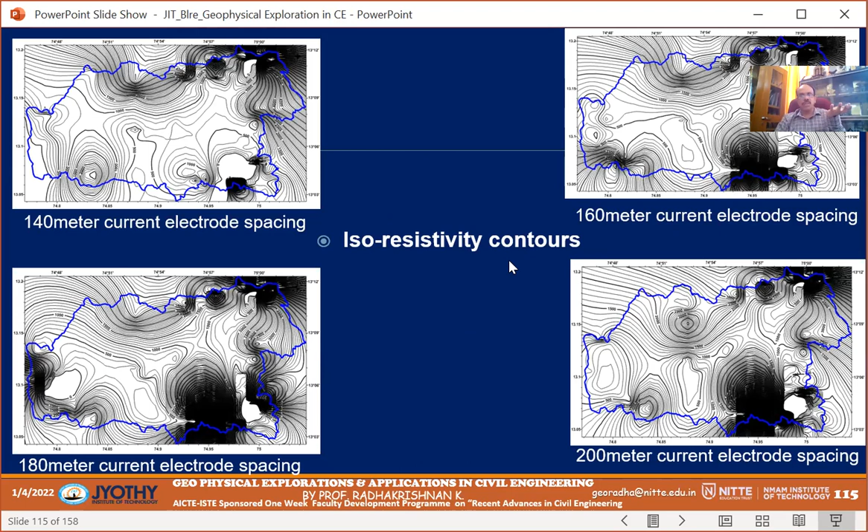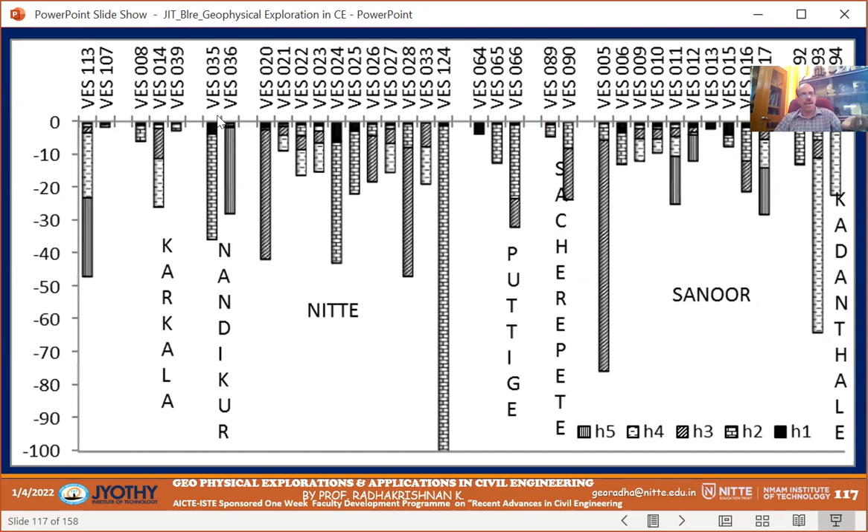So the laterite top terrain, how it varies. In reality, how it looks: all the borewells, the depth varies from place to place. So coastal terrains, look at this coastal terrain area where the depth is shallow, in laterite terrains, and even saltwater intrusions. I have taken about 5-6 in the coastal stretch here, with saline water intrusion. You can see that it is very shallow.

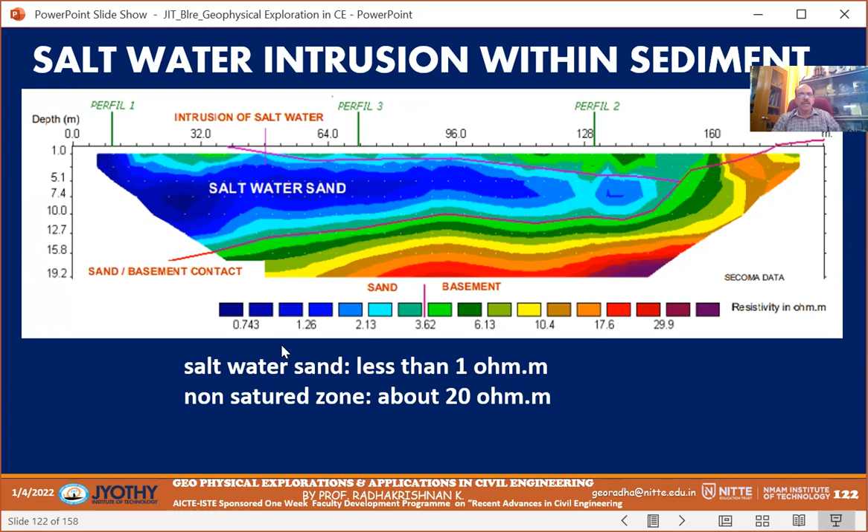Very shallow area, 0.5 meter, 0.1 meter, within 1 meter depth, and some places within 0.5 meter depth. Saltwater intrusions happen here. In a 2D picture you can identify saltwater sand zones through tomographic surveys, and also fractures - which are possible from this survey alone - where you can tomographically identify where the joints were.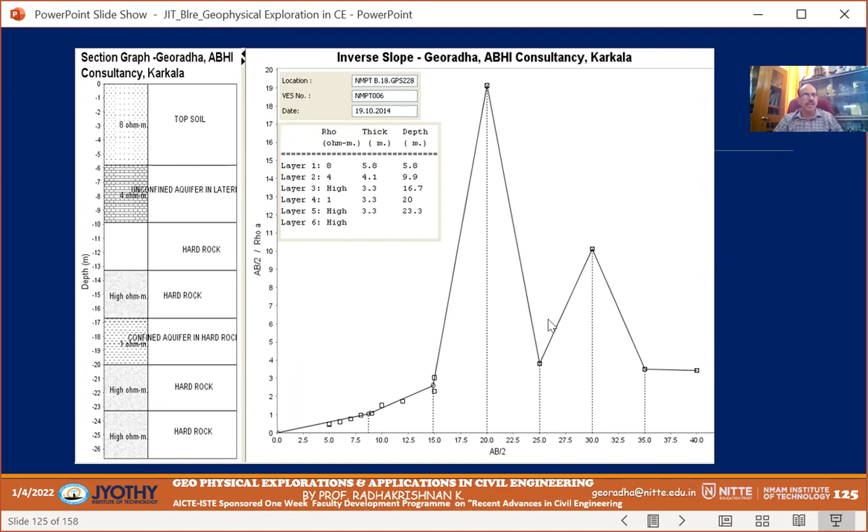You can see this curve here: suddenly saline water up to this depth, but about 20 meter depth it starts very hard granitic zones. Another NMPT site here shows different variations - hard rock starting very shallow, at 10 meters itself.

Another plot of hard rock terrain shows it starts about 10 meters on average, in some places. Based on that, they have to plan the berth depth, and digging operations have to be done accordingly. This is all from the NMPT sites, showing different hard rock terrains.

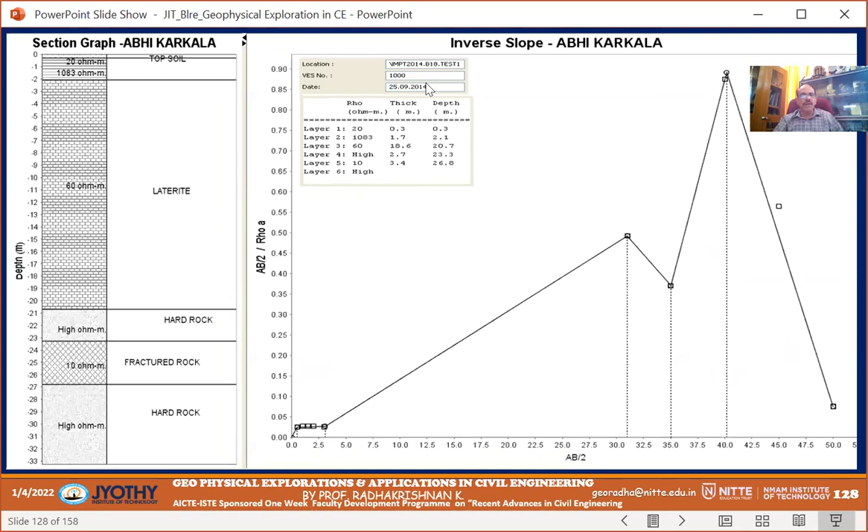So earth resistivity tomography - as I told you, put all these things together for the survey. Once you lay it out, the switching takes care of it. You start to work, and continuously, if there is leaching, you can monitor it remotely. You put it as a permanent structure and use remote control. 2D and 3D imaging techniques can be used here.

So, how Wenner and Gamma - I'm just switching over. This is how the SS electrode works, this is the tomography which I conducted. I showed the Vincent Hills survey which I conducted.

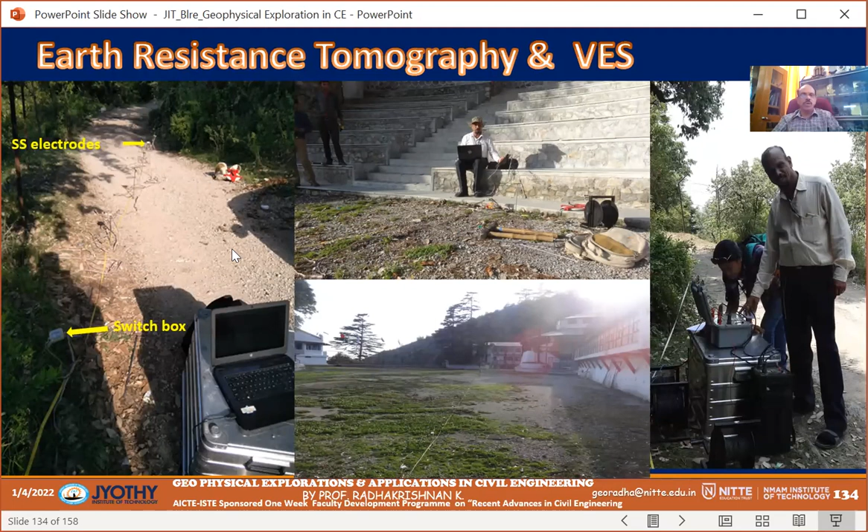So first the layering, this layout will be done here. Then the switch box, programmed by computer, starts sending current, and it will switch over to the next two electrodes. Like that it keeps switching over, and finally you get a reading.

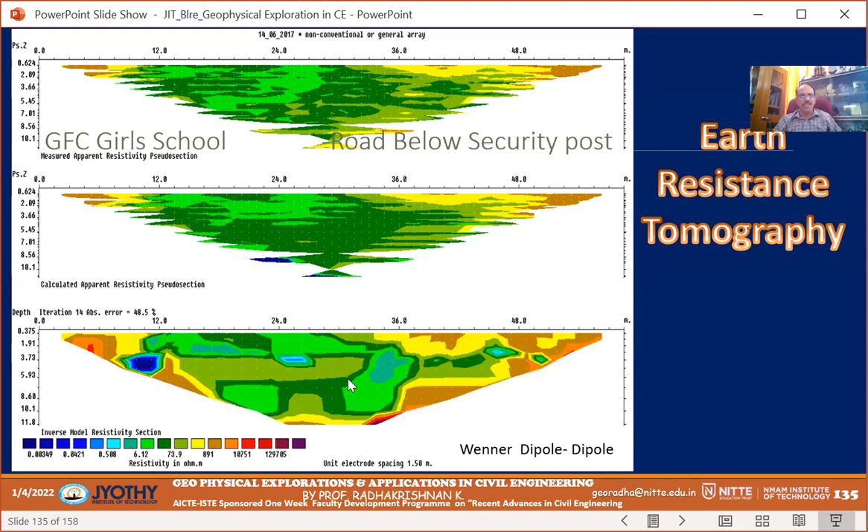Now when you plot all these things, different methods are used. I showed you this road below the security post where I was standing and taking the survey. This is what I had to interpret, to find whether there is a low resistivity zone. In this place, say 1.23, there is very high porosity and very good conductivity.

So in this zone I found it, and I conducted vertical electrical sounding, and found that at almost the same depth water is available here. They drilled it and got a very high yield.

So a filled up ground can be made out easily here in the hockey ground. It's steep, the other side is also a steep one. So these are some of the things.

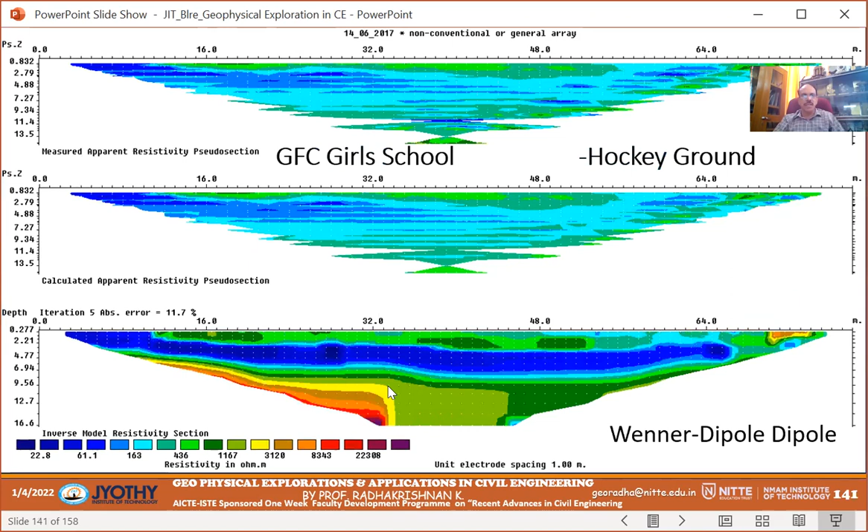Let's see here - dipole and different methods also show the depth where water can be identified. This is in Vincent Hills which I showed you. Then geotechnical applications include groundwater levels, shear strength, bulk density, porosity, permeability, etc., and weak materials can be identified.

So there is a case study we made, I'm presenting two of them here. This one is near the civil engineering department, I think Attavara. There is an SPT value we took, and we conducted a resistivity survey at the same point.

You can see 8.05 meter here and -8 - that means it matches exactly where the granite started in vertical electrical resistivity, where I got the value at 8 meters. Here you can see 8.1 meter, same thing here 8.05 meter - almost precisely it matches where the hard rock starts.

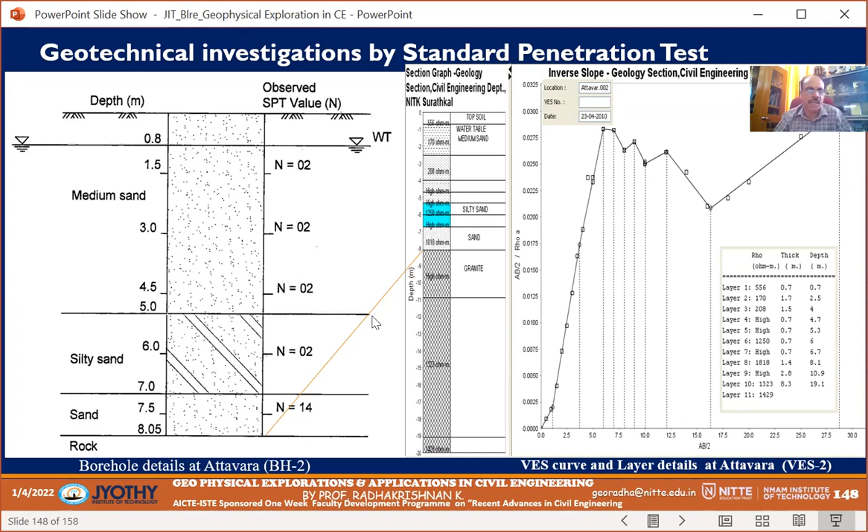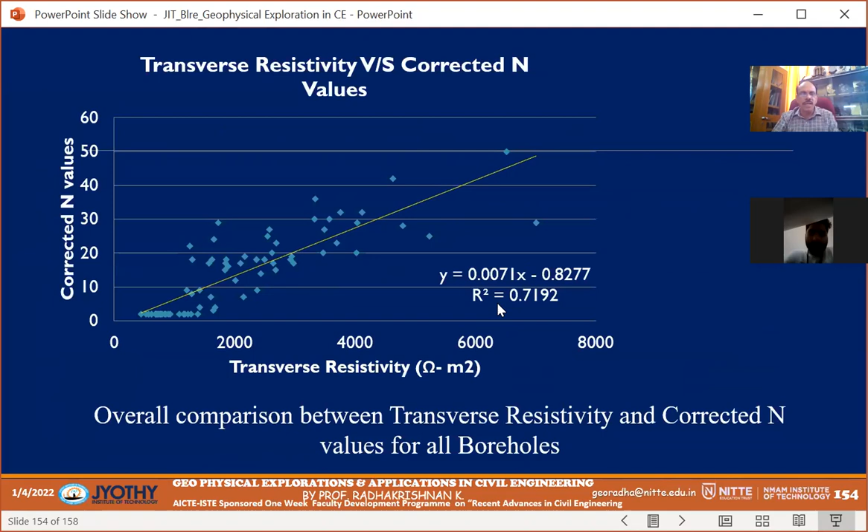What was required was a little expertise, and we plotted corrected N values and apparent resistivity, and finally came to a conclusion. The apparent resistivity and corrected N values were matching, and the overall comparison made with transverse resistivity corrected N values for all the holes matched almost 0.7192.

This shows it's better to correlate with transverse resistivity rather than apparent resistivity, since better correlation is found there. So this way, the SPTN we are doing can be saved and we can go for geophysical methods instead.

But some standardization should be made for this, as it may vary with each type of area and terrain. Once such a relation is known for a particular location, soil strength can be determined from the best results itself. I'll conclude now since time is closing.

Geophysics, a non-destructive type of task, has a lot of applications in engineering, from foundations to maintenance. I've shown you some of the things possible within this short span of an hour. It's like a scanning study which can look inside the earth using simple principles of electromagnetic field nature, seismic wave physics, and anomalies, to construct the inside geometry and properties of materials beneath. Knowledge of geology and geotechnology is also required for this, because you cannot just blindly interpret. So it's a fast, cost-effective, time-saving method to study the properties of soils and rocks beneath.

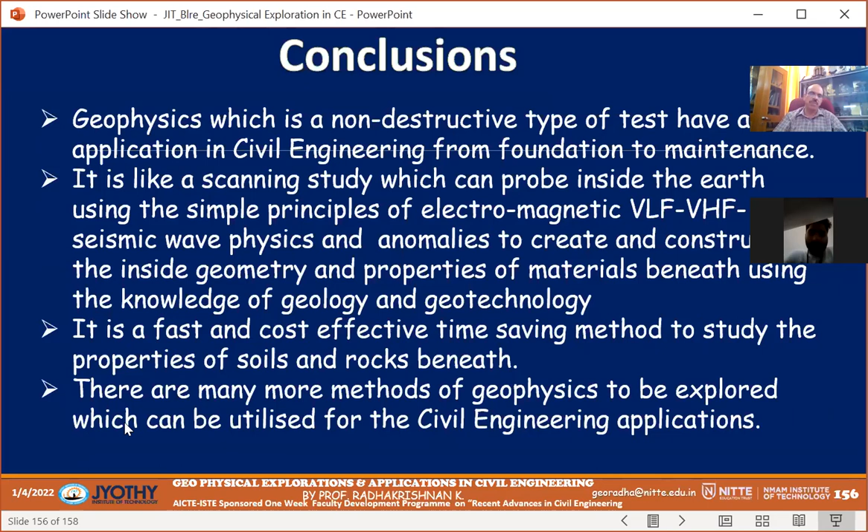There are many more methods of geophysics, as I told in the beginning. Still, the potentiality of geophysics is not fully explored. There are so many possibilities to explore which can be utilized for civil engineering applications. Any questions, please? Thank you.

Thank you very much, sir. It was a very informative session. We have a few questions from the participants, sir. I will read them one by one.

Sir, the first question is: when aeromagnetic studies are conducted, can we use thermal infrared images to carry out mapping of rocks on the basis of variation in thermal inertia?

Of course, thermal inertia and thermal scanning are useful because different types of rocks reflect light differently, meaning their spectral signatures vary. Different rocks reflect back and absorb energy in different ways, so with some experience we can make this out. That is possible. Was that the first question? I think this is the question. Am I right? Yes, sir, this is the first question.

The next question is: how do we measure moisture in a structure, and the extent of moisture permitted in a masonry structure? The best method is electrical resistivity, because if moisture is present and you put two electrodes in, current passes through easily.

For example, if you put a bottle of water and place two electrodes in it, current passes through it easily, right? So in concrete, where you doubt moisture is present, place the electrodes in that area, send current, and measure the potential, so you can understand whether moisture content is there or not based on the resistivity. If more moisture is present, conductivity will be very high, meaning resistivity will be very low. This way we can understand the moisture condition.

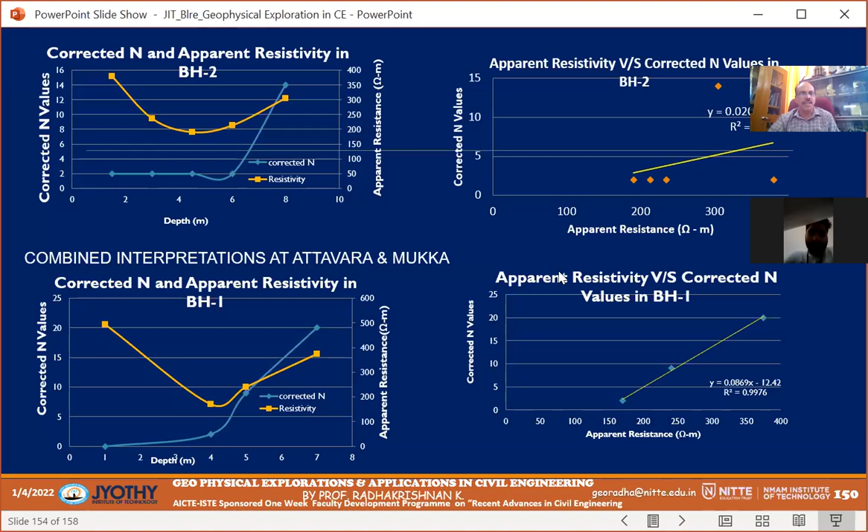You shouldn't interpret blindly. For example, if you get an interpreting curve plotted, it depends on the curve itself. How will you know whether it represents a fracture zone, a water zone, or a clay zone? Look at the curve shape. It follows rho 1 plus rho 2 plus rho 3, where rho 3 is the third layer, and it's pulling down. Based on the value range, say 0 to 50, that is usually a good potential aquifer zone.

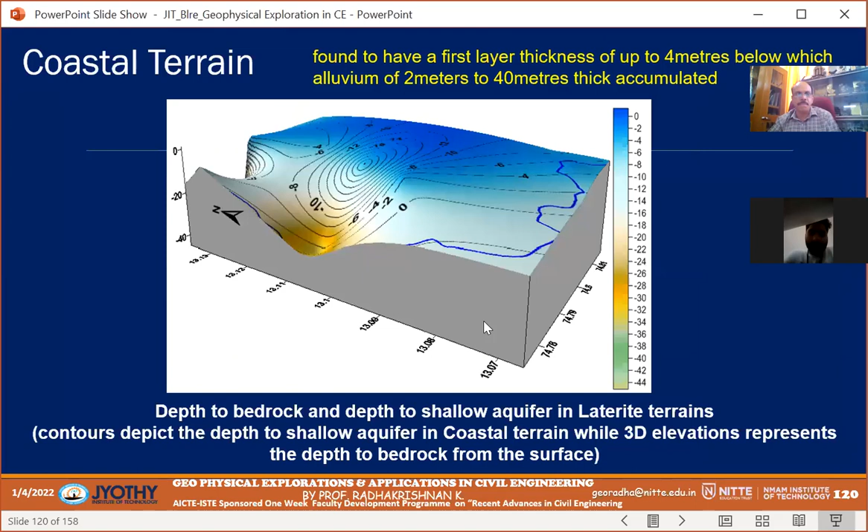If it is in a coastal area, coming around 20, 15, 5 meters etc., I have shown you some slides, some values, some plotting here for the coastal areas. You can see that in that area, the resistance value is very less, shown in ohm meter around 60, or even 0, 0.5, 1, etc. Very low values are typical for this.

But it always requires effort to distinguish between freshwater and clay. What is required is you should have at least a geological knowledge of the area.

Thank you sir. Next question: is there an IS code for the resistivity method? I'm not aware, sir, sorry. Because resistivity method IS code means for what purpose? It's a method used in different fields. IS code is meant for a standard method, or IS code for the standard value you are getting. Because for certain things like groundwater, we can't say that within this range you will get water. So IS code, I don't think so.

Thank you sir. The last question is, how effective is geophysical exploration in locating groundwater? In many cases, they failed. Why? This is a good question. Actually, all the failures may be because of many reasons.

One thing is, when you conduct a survey, manual influence will be a lot, because you are sending two of your workers or assistants to two sites to put the electrodes. If there is a wire, cable, or a transmission line, they are also creating electric interference. I found these problems in many cases. If a pipeline, cable line, electrical wire, or telephone line is above, because all these are electromagnetic waves, they will induce waves.

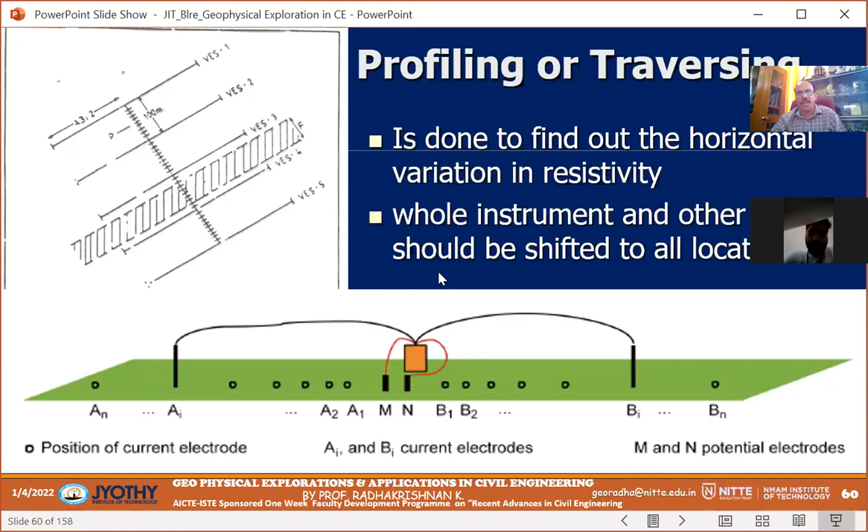As I told you, cable lines, pipelines, telephone lines - all these you have to watch for, because these cause interference problems. The line should always be straight to avoid interference. We also keep what's called a virgin zone where we place the instruments. Near the instruments, up to 2-3 meters, I don't allow people to walk around, because that will influence the readings a lot. If any movement happens in that zone, there will be conductivity changes - a self potential will even be developed by you standing there. Usually, when you go for a survey, what happens?

All the people, curious people, will be coming and standing around, and it will be disturbed. And another thing is, there will be a crusher or something working. That also will influence. So sometimes the vibrations will create a problem here. So there are so many reasons for these failures.

But one more thing I'll tell you. Scientifically, if one failure happens, people will propagate it. And what I have seen, the diviners and others, they give the sites, and if a failure happens, people will not talk about it much. But for anybody using scientific methods... this may be a mistake of the person who conducted the survey also.

I hope I answered this, because it's a most interesting question, and by experience I would say that even I have failure cases. I don't say that I am 100% successful in this. I think at least 5% failures happen in my surveys also. I have found many reasons for that, and wrong interpretation also may occur in some crucial areas.